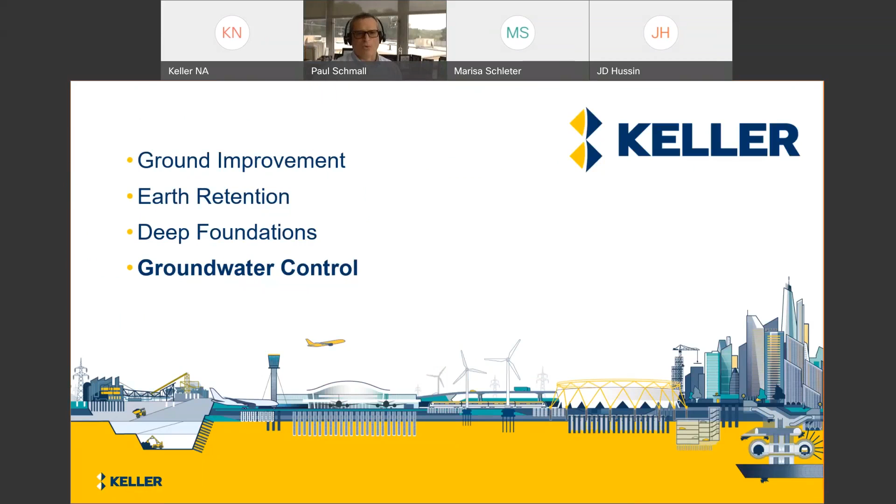And groundwater control may consist of these different techniques that you see on the screen. So I'm going to talk about these techniques today in the next hour. So I'm trying to cover a lot of ground. So this is one of these presentations that's going to be 1 inch deep and 1 mile wide. So I am also assuming that everybody really has a familiarity with these techniques. So I'm not starting from square one with every one of the techniques and describing the technique and the pros and cons and the applicable soils and et cetera. I've stepped beyond that, and I'm assuming that everybody has passed Geotechnical Construction 101.

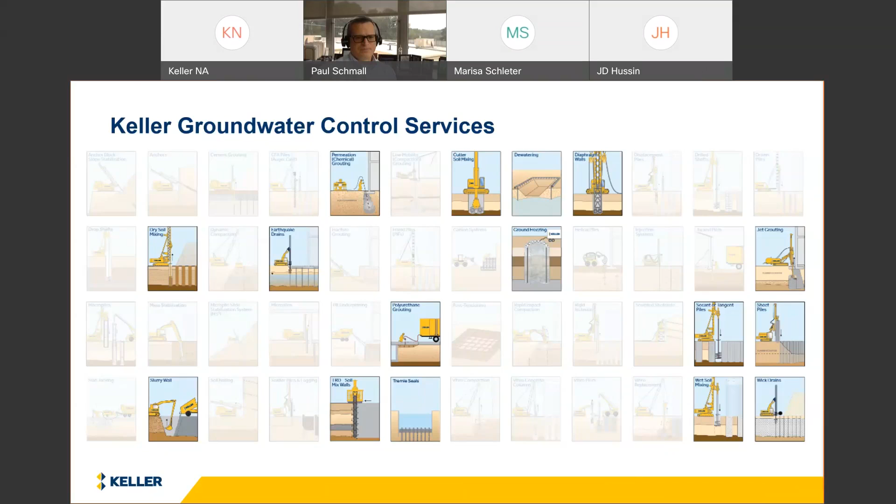So my suggestion is if I'm skipping ahead too much and you want more details on one of these techniques that I'm talking about, go to Keller's website, because there's reams of information there on all of these techniques. So in this big fuzzy category of groundwater control, there's really 2 different approaches. We can be lowering the groundwater, or we can be building barrier walls. And I kind of think of it like we're working with the groundwater, or we're fighting it, we're embracing it, or we're working against it. But it's two kind of different philosophies.

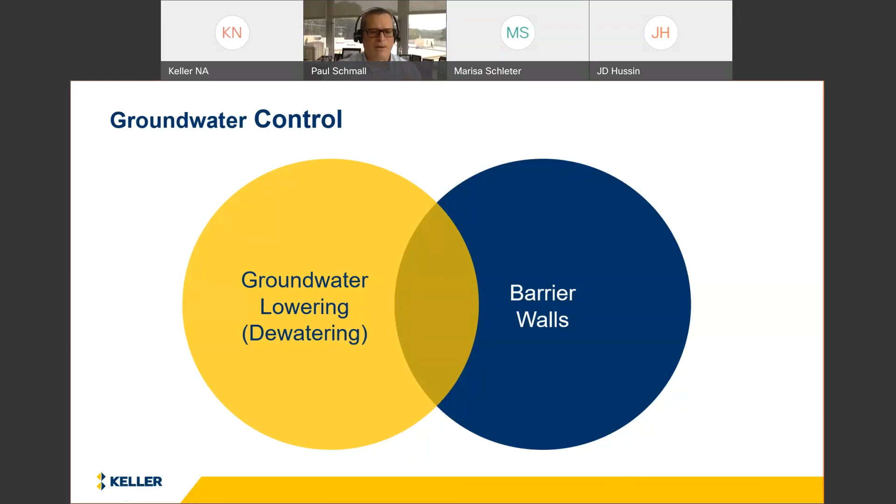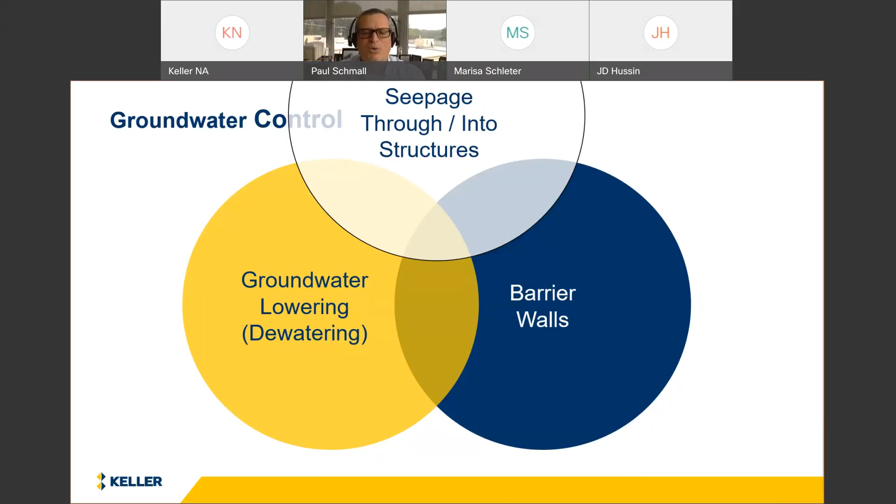And sometimes there are places where there is this overlap where the combination of these things is the right solution. So what I'm going to talk about is 3 areas of groundwater control: groundwater lowering, which we'll refer to as dewatering, that's the simple word; construction of barrier walls or cutoffs; and then managing seepage into or through structures, or excavations. So this is a lot of stuff here. So like a rat approaching a large block of cheese, we're going to start from the top and we're going to nibble our way down. So we're going to talk about dewatering first.

And I think most people intuitively know that the purpose of groundwater lowering or dewatering is not just to eliminate the inflow of water into an excavation, but also to improve the characteristics of the ground. And the photographs illustrate that very well. Same site, same ground, wet versus dry. Or in geotechnical language, more precisely, the difference between saturated and drained. So you can see the difference. It's workability, it's stand-up time, it's stability, it's shear strength, it's slope stability in excavations.

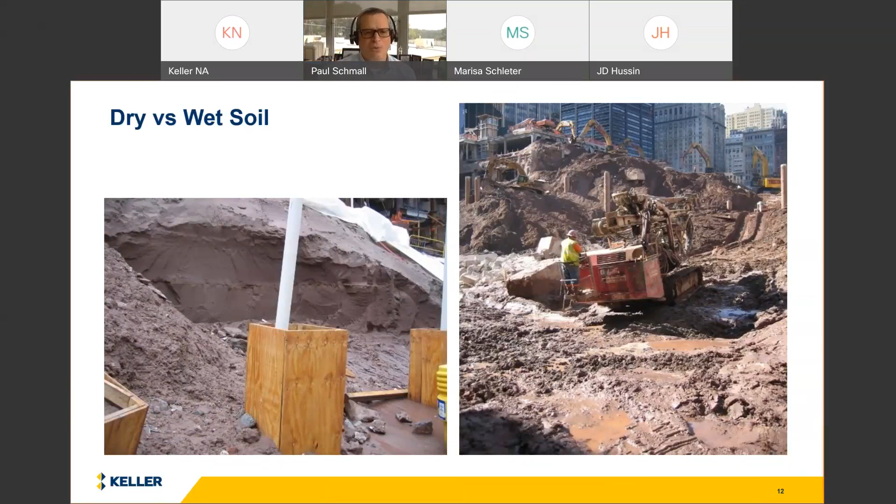So this is the same thing, drained versus wet. This is actually lower Manhattan silts that I will often refer to as bull's liver. And if you're from around New York, you know what bull's liver is. But if you're not from around New York, you have no idea what bull's liver is. Bull's liver is the native non-cohesive silt of lower Manhattan. And then this other example here of my wet versus dry.

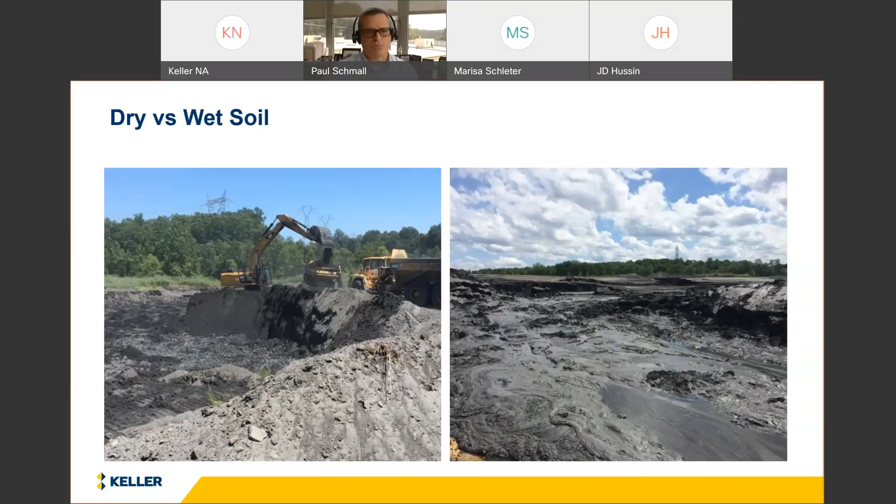This is actually fly ash. We're doing a lot of work these days in fly ash and coal combustion residuals because of the federal mandates to close all of these fly ash ponds across the country. So the fly ash is interesting because it really exemplifies and amplifies all of these unfavorable characteristics of fine-grained, non-cohesive soils that we learn about: undrained shear strength, capillary action, liquefaction susceptibility, which is what you're looking at in the pictures here.

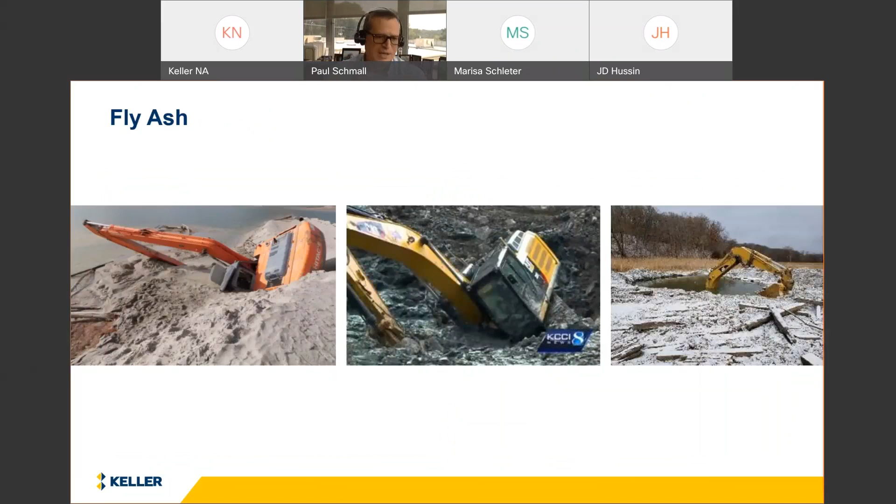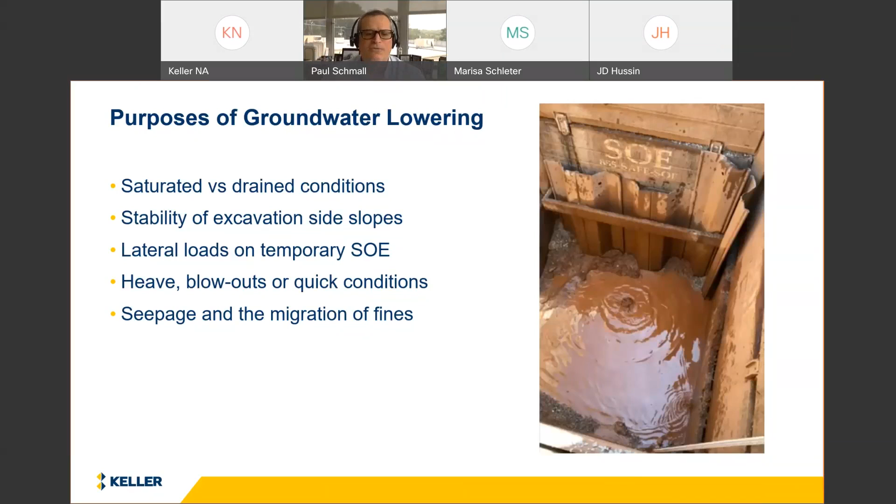So with the purposes of groundwater lowering, like I just said, the one that I think people think of maybe first or foremost is saturated versus drained conditions, stability of excavation side slopes. Sometimes it's for the purpose of taking lateral loads off of support of excavation. Then there's also the purpose of preventing heave or blowouts or quick conditions within an excavation. But the biggest one, or the most critical one, at the bottom of my list here is controlling seepage and the migration of fines.

My scary example is this. This is a project in Cologne, Germany. This was probably about 10 years ago now. It was a dewatering mishap. It was a tunneling project, a deep shaft excavation, and they were pumping water from inside of the excavation, like you see in the figure on the right.

But they were pumping, we call it open pumping, just throw a pump into the excavation, pumping a lot of water, and maybe with every gallon of water they were pumping, they had a little bit of sand in the water. So over time, a lot of gallons equals a lot of sand, and you've moved a lot of material. And what they believe happened was they lost the passive toe of the slurry wall because of piping inside the excavation, and then the shaft collapsed. This is my extreme example of migration of fines with improperly executed dewatering or improperly executed groundwater control.

So the big thing, all those other purposes that I mentioned before, they may be very significant purposes, but they don't have catastrophic ends such as the migration of fines. So this is a more realistic, more day-to-day example of migration of fines. It's an excavation where a contractor installed widely spaced dewatering wells, and it should have been closely spaced, and they had water flowing into the excavation, and the water is bringing sand into the excavation. Bad things happen where the ground comes from when the ground migrates.

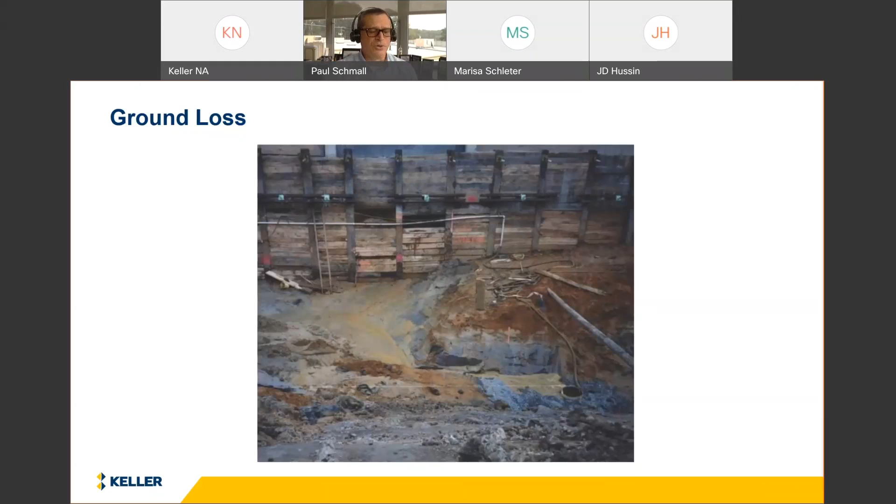So when we have the need for lowering the groundwater, we're in soils that are susceptible to movement. We do this thing that we call pre-drainage dewatering. What does that mean? It means we're installing wells, well points, or ejectors, the common tools of dewatering, in order to pre-lower the water level within an excavation prior to the excavation. It's key that you construct the devices properly so that they disallow the migration or movement or erosion of the natural soils. That's all in the filter pack design.

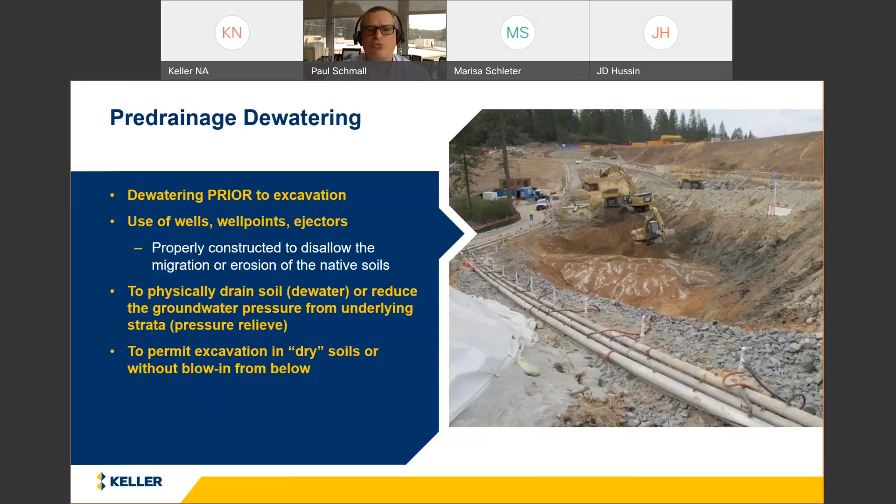And then we will physically drain the soil, which is what we call dewatering, or we will reduce the pressure underneath an excavation. That's what we call pressure relief. And this will permit excavation in dry soils or prevent blow-in from below. Okay, that's pre-drainage dewatering. Dewatering is easy when the soil is free draining.

I should say it's readily achieved. Maybe it's not easy, but it looks like it's well done. The end result can be achieved readily if the soil is free draining and there are no impediments to drainage, no impediments like layering within the soil. Okay, and when the amount of recharge that may be present at a site can be accommodated by the dewatering system itself.

Okay, in the photograph here, you see a picture of an excavation out in the middle of a river. You can tell that it's clean, sandy soil out in the middle of a river. And most people would say, whoa, you can't do that. You're right there, you've got your recharge right on top of you. It's done all the time. Dewatering contractors do this all the time. They understand that if the dewatering system has the capacity to handle and accommodate the recharge that may be available locally, it can be done. So this is what can be readily achieved.

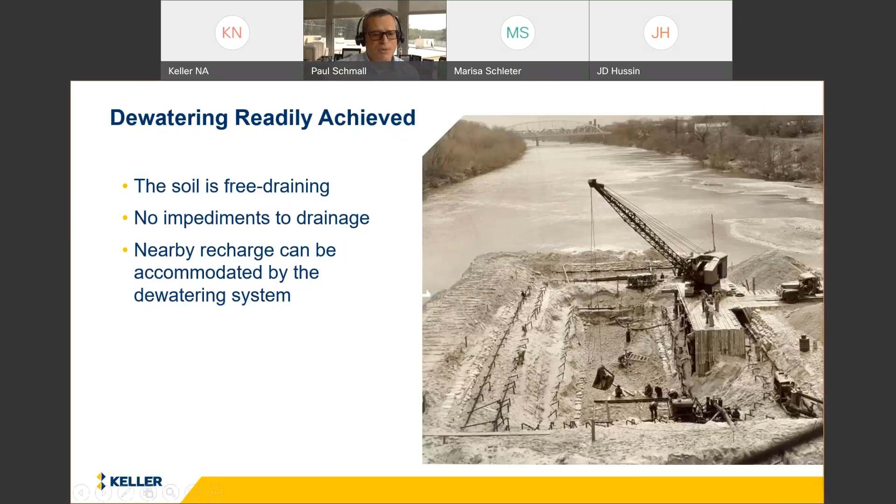When it is difficult is when you're in a situation where the soil doesn't want to give up the water. You're in fine-grained soils that don't readily give up their free water, or you have impediments to drainage. Water has to flow vertically for dewatering or groundwater lowering to occur. And when you have horizontal layers that prevent the water from flowing vertically, that's an impediment to drainage, like you see in the picture in the upper right. And when you have a condition like that, you subsequently have a condition like the one on the lower right, where this is an excavation that has basically been abandoned because it got down to an interface where coarse material is over fine material and the water just wants to flow into the excavation.

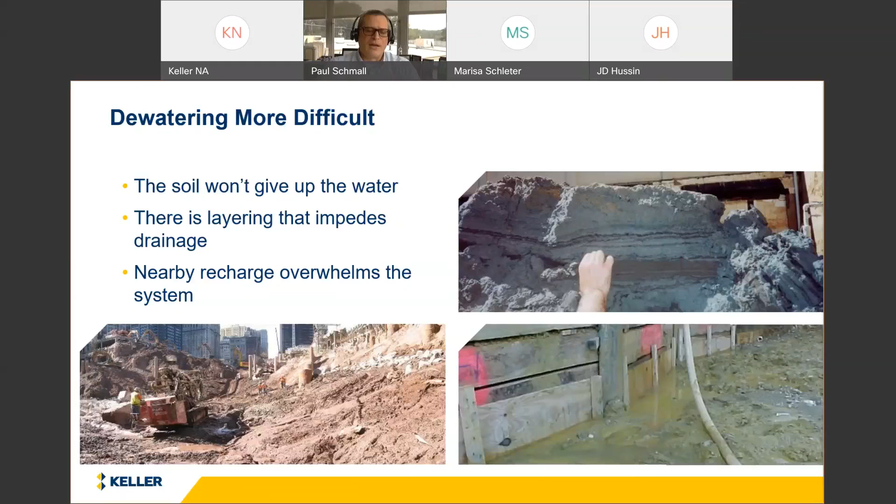So I mentioned when dewatering is readily achieved, the dewatering system can accommodate the recharge. When you're in low permeability soils and you have a dewatering system that's going to draw very little water out of the ground, if you have more water than that capacity introduced to the situation, say from leaky utilities or something like that, that's when you're going to have problems. And you typically have problems in low permeability soils because of an amount of recharge to the site that overwhelms the capacity of the dewatering system.

So these are a number of projects here. I'm in fine-grained soils. I want to say beware of the non-cohesive silt material. Every one of these pictures, there's a story behind it, but most of these stories really go back to somebody thinking, oh, you know what, it's low permeability soil, it's not a big deal, because somebody will say there's not a lot of water in the ground. That's kind of like the old school way it's referred to. Oh, there's a lot of water in the ground over there, or there's not a lot of water in the ground over there, whether it's high permeability or low permeability.

When it's low permeability material, there may not be a lot of water in the ground, but the material may not be stable at all when it is saturated. So that's when you have these horror stories, these unfortunate occurrences. So this is my most common dewatering misconception, and that is, if there is a lot of water in the ground, then the need for dewatering should be taken seriously. Okay, that's not the way to gauge it. It should be based on the likely stability of this ground when saturated, and that should determine if dewatering should be taken seriously or not.

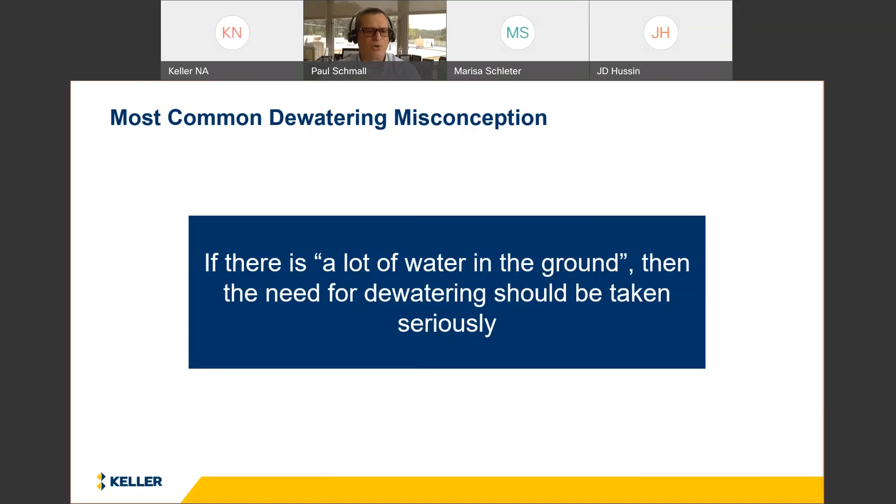So how do you know? How do you flag when you have these types of soils? I'm going to give you a little quick recipe. Okay, the typical non-cohesive silt that pops up in various areas around the country typically has a grain size distribution curve that looks like 10% sand, 80% silt, 10% clay size particles.

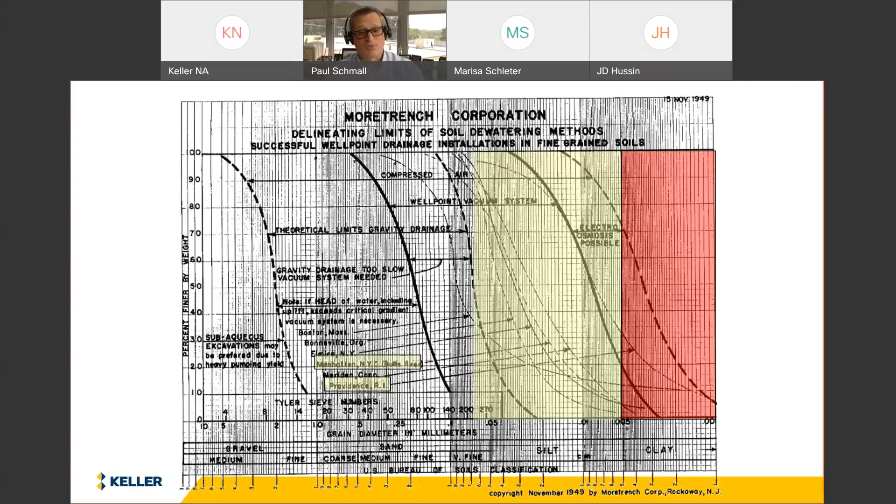And of course, there's a plus or minus with that. But then there's a very low plasticity index, typically less than 3. So this is Manhattan bull's liver silts, the material that I showed you before that's around the World Trade Center. Very, very well-known unstable materials. Providence silt also has the same grain size distribution as typical fly ash, which is a ridiculously unstable material.

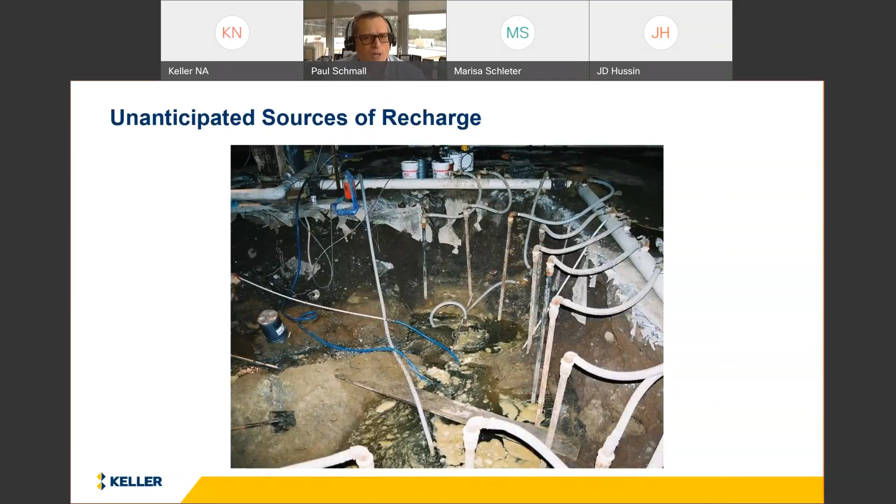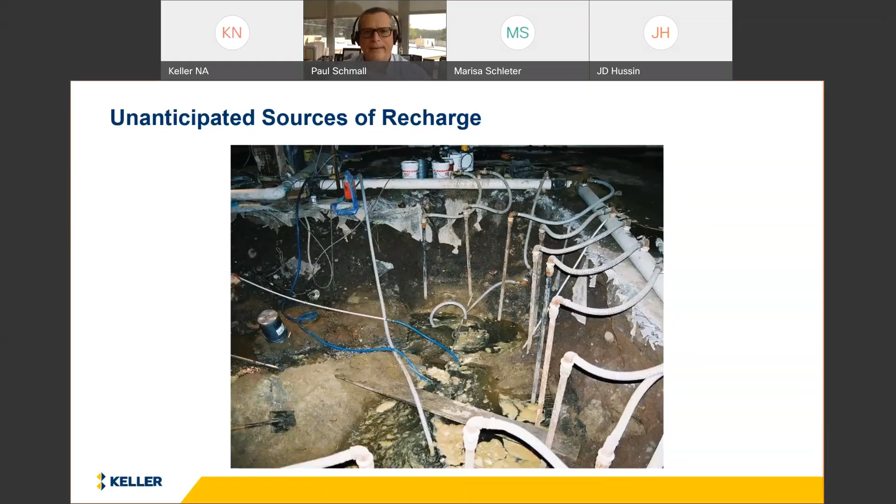And then beware of unanticipated sources of recharge, like I mentioned, particularly when you are working in low permeability soil, where your site has very little ability to absorb any kind of recharge that is introduced to the site, say from leaky utilities, or runoff that finds its way to one particular area of the site. This photograph here is an unfortunate condition on a site where there was water flowing through filled ground and filled ground below the water table. It's a mixed bag. You just don't know what you're going to have. So beware of water and fill, and especially in low permeability soils.

And then when you're doing dewatering in urban areas, you're always going to have water treatment. You have contamination everywhere in urban areas, and even if it's not on your site, you have contamination across the street. It's coming. So there are reams of water treatment technologies that you can use to address the water conditions on any site. You need to know not only the chemistry of the contamination on site, but also the natural groundwater chemistry. Do you have fouling agents such as high iron in the water, which tends to gum up treatment equipment? You need to know the aquifer parameters like permeability, radius of influence, et cetera, so that you can design a dewatering system, because with the treatment, you need to know the flow rate. Because that's going to drive the cost of the treatment.

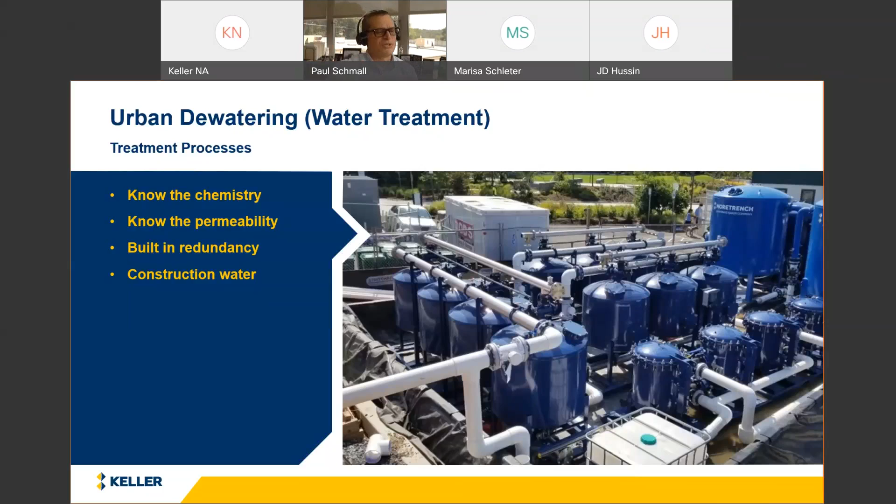And then on dewatering systems, you have to have built-in redundancy so that you can maintain, swap out equipment, change media, et cetera, without ever having to shut down the treatment system. It's not like you're treating the water at the corner gas station. You have to have a lot of built-in redundancy with the system. And then sometimes the construction water on the site is actually the most difficult thing to treat for. So that was it for dewatering. Okay, that was the crash course, a third of an hour.

Okay, so now we're going to talk more about groundwater exclusion, cutoff walls, and barriers, like I mentioned. So we're on groundwater control area number 2. The first thing that I want to talk about is the concept of the bathtub excavation. I use that term to describe excavations that have impermeable perimeter walls that extend down to a natural cutoff stratum, a low permeability layer, or if there is no stratum within reach, there's a man-made bottom. But it's a bathtub, it's a watertight excavation.

So why would you do this? You typically do these bathtub excavations in urban areas where there is concern about contamination migration, or the presence of compressible soils, such that if you lowered the groundwater 300 feet outside of the site, you're going to see settlement out there of those structures. You may have timber piles. Boston, New England, are well-known urban areas where you have timber piles that can't be dried up and then resaturated, because you get biological degradation of these wooden piles underneath these old historic structures.

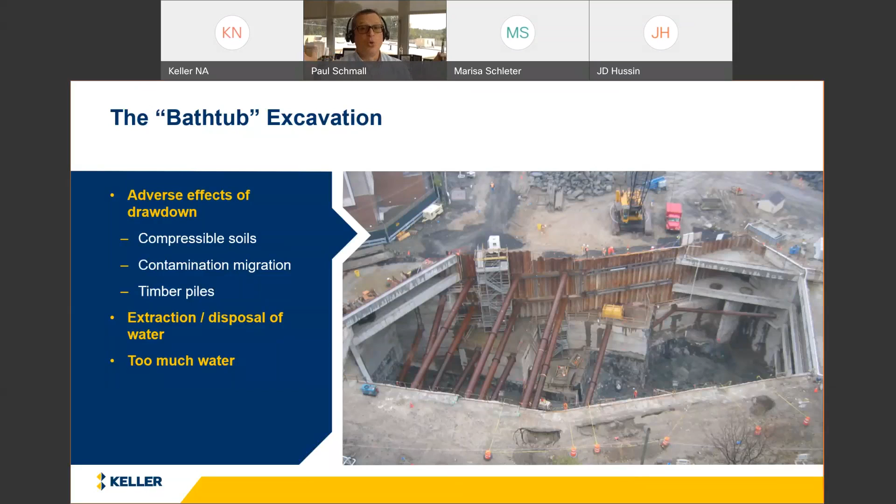Sometimes you make a bathtub excavation when there's an issue with extracting water out of an aquifer, or there's an issue with disposing of the water or the mechanism of disposing of the water. Sometimes, and I'll talk about an example or two, if you were going to dewater an excavation, it's just too much water to handle, to dispose of, to get rid of, to pump, to economically dewater. So when you have these bathtub excavations, there's really two components. You have vertically installed perimeter walls, and then you have a bottom. And we're going to talk about the man-made bottom for these bathtubs.

So you can see my icons here, the techniques that you would use for the construction of these perimeter vertical walls. Steel sheet piling, but I'm not going to talk about steel sheet piling.

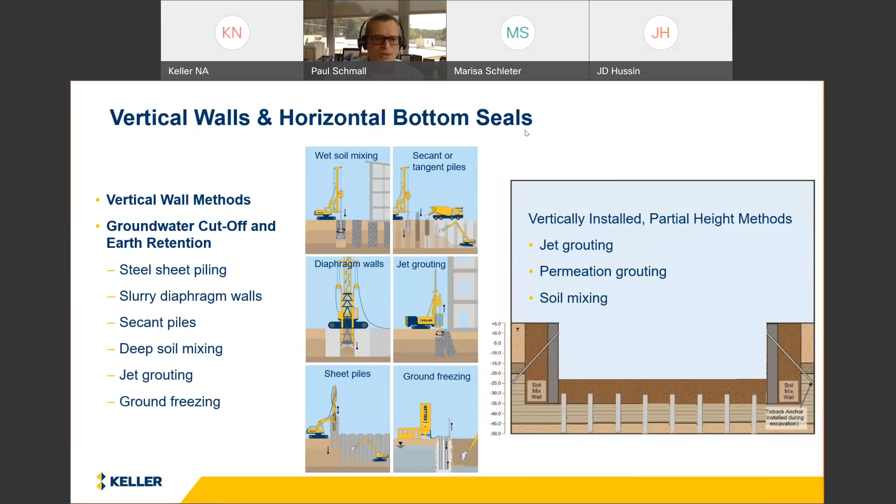You guys don't need me to talk about steel sheet piling. Slurry diaphragm walls, secant piles, deep soil mixing, and then I would say less commonly, but in special circumstances, jet grouting and ground freezing. You see ground freezing when it's more like, instead of a bathtub excavation, it's a bathtub shaft. It's a very deep excavation. It's a tunneling excavation. So let's talk a little bit about those.

So this is a good picture of slurry diaphragm walls. With slurry diaphragm walls, and for all of these things, I'm going to try and show you the tools that are used for constructing them. With slurry diaphragm walls, you have a couple of different tools depending on the depth and the ground conditions. The simplest and most basic is a cable operated clamshell, which could get you typically to about 120 foot in depth. You could be in a reasonably wide range of soils, but if you get into boulders with the clamshell, you're using a chisel, which some people would refer to as a barbarian technique for excavating slurry walls.

So the cable clamshell, the next step above that is the hydraulic clamshell. We have been to 250 foot depth with hydraulic clamshells in stiff soils. The hydraulic clamshell, as opposed to the cable clamshell, is steerable. The frame is steerable, so you can steer as you're excavating. Built-in inclinometers, you know where you're going with the hydraulic clamshell. You're going to get to 250 foot depths with both the clamshell installations. You're going to have end stops. You're going to have water stops. When you jump to the next tool, the hydromill eliminates the need for end stops and water stops.

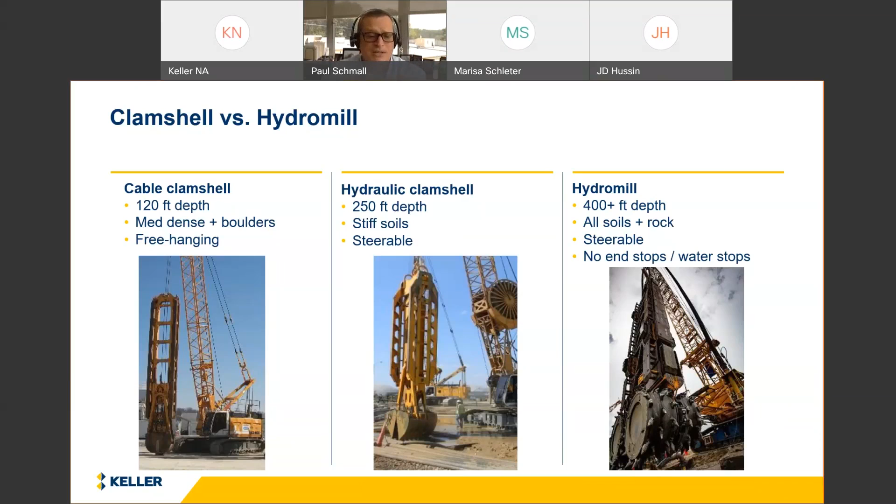And a lot of the conditions that we have experienced, at the time, we were very much first. We have lots of boulders, high permeability overburden, hard abrasive rock, low headroom conditions, very steep rock surfaces. I think we've been through it all. We've used the hydromill for the vast majority of our work, and we'd be very happy to share our experiences with you with all of these techniques, to be honest with you. But particularly, our resume with diaphragm walls is outstanding.

One of my favorite projects is this Blue Plains Tunnel, 42-inch walls, 175 feet deep, with blockouts built into the wall, so that once the shaft was excavated wet, you could punch out the shear plugs into the wall, so that the tremie that was poured at the bottom of the shaft was keyed into the wall. We do that typically on these diaphragm walls. So you can see some of the big cages that were used here for some of the larger multi-bite Y panels that were done on this binocular shaped shaft.

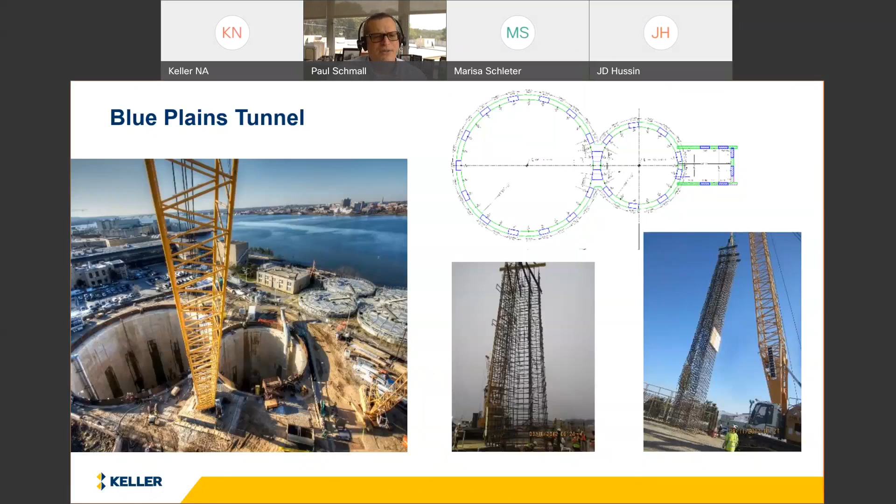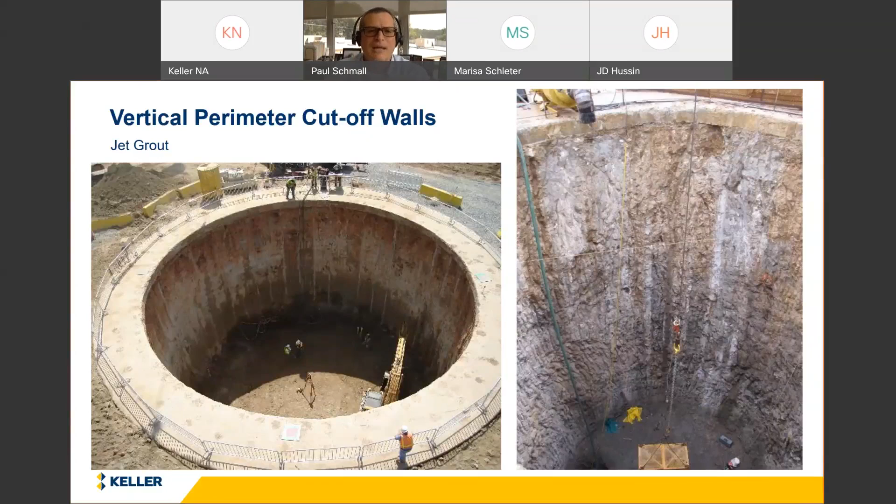That's where you would typically see jet grouting as well. Jet grouting is applicable over a wide range of soil conditions, and like secants, it's susceptible to borehole deviation, which is probably its limiting factor. So if diaphragm walls, slurry diaphragm walls, and secant piles are replacement techniques, jet grouting and soil mixing are mix-in-place

techniques. So the end product is basically a function of the in-place soils and the binder that you introduce in the process. Soil mixing is appropriate for ground that's neither very stiff nor very dense, with no boulders or obstructions, and where your treatment depth is typically less than 40 meters. And for most soil mixing techniques, you need unrestricted headroom, because most soil mixing techniques are single stroke operations.

So if you're going 100 feet into the ground, you need 100 feet plus of equipment to do that single stroke. But with soil mixing, I swear there are 31 flavors of soil mixing, and every contractor has their own special setup, and it really comes down to what's the tool that you're using to do the mixing, and all sorts of variations with the flights or the blades and shear blades on the tools. What's the orientation of the axes, and are you introducing jetting into the operation? You can mix and jet at the same time. So that's kind of how, with all these different variations, you get

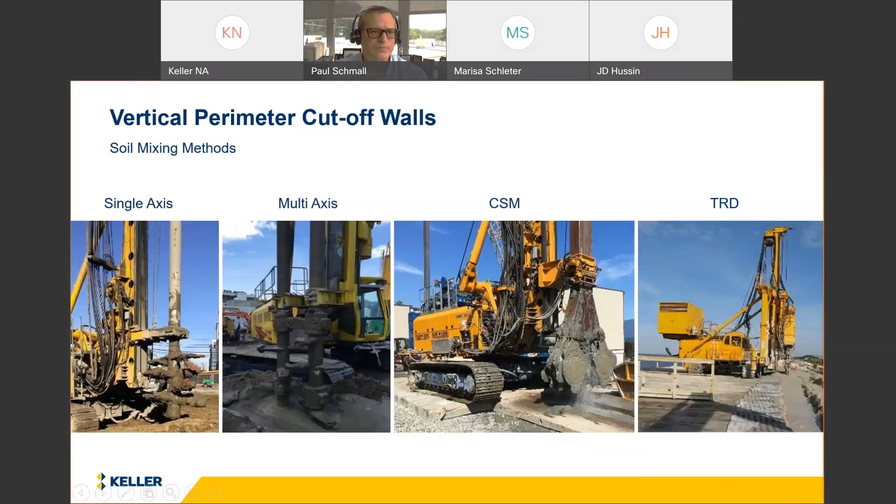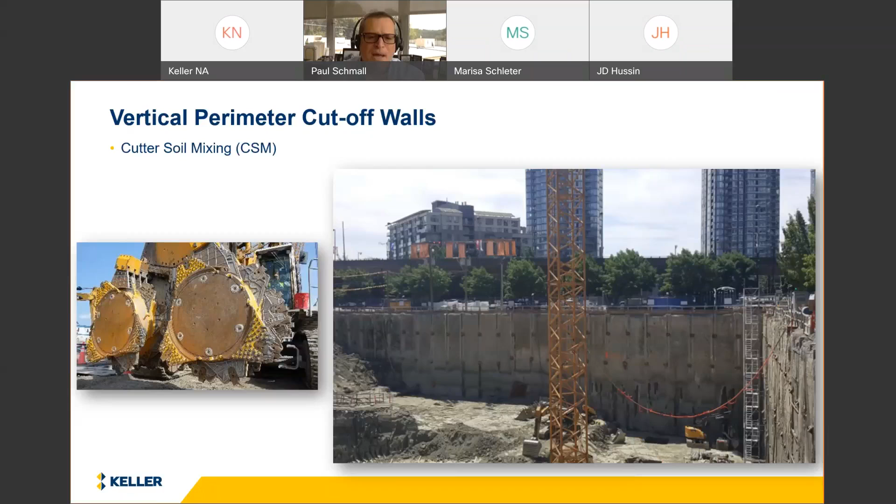So the first one I want to talk about is what is known as cutter soil mixing, or CSM. The tool looks like a hydromill, because basically it's the same cutting wheels as a hydromill uses. But instead of displacement with these horizontal axis rotating cutter wheels, you're mixing the soil as you penetrate down and introducing binder on your way back out. It's a more aggressive mixing technique, so it's applicable to a wider range of soil conditions. And I think you can see you can penetrate a lot of things with these cutting wheels. So we've done this technique up to depths of 130 feet. I believe the equipment is capable of going to about 165 feet. And the photograph that you see on the right is a structural CSM wall where you mix the soil in panels and then drop beams into the panels for your reinforcement.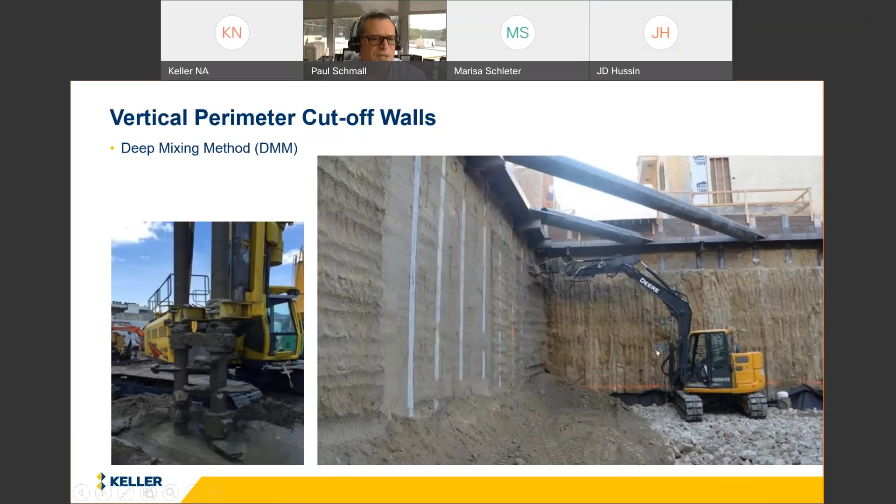So the next technique would be multi-axis mixing, and there can be 2 different vertical axes. There could be 4 or 5 different vertical axes, and that's a configuration that lends itself very nicely for making walls. So you see on the picture on the right, we're trimming a soil mixed wall within this excavation. And then TRD is short for trench remixing deep.

This technique is very good for making very homogeneous soil mix. You will mix very thoroughly from top to bottom within this trench, which is not something all soil mixing techniques have; they don't have the same homogeneous mixing as the TRD does. Beautiful things about the TRD: there are no joints, and it's always the joints in cutoff walls that are the point of weakness. There's no joints. It's thoroughly mixed. It's a relatively low headroom piece of equipment. How I said most soil mixing techniques are single stroke, very tall pieces of equipment. This is a low headroom piece of equipment, which is good for working very close to water, where water is within a couple feet of surface, and where there may be more concerns about working platform stability.

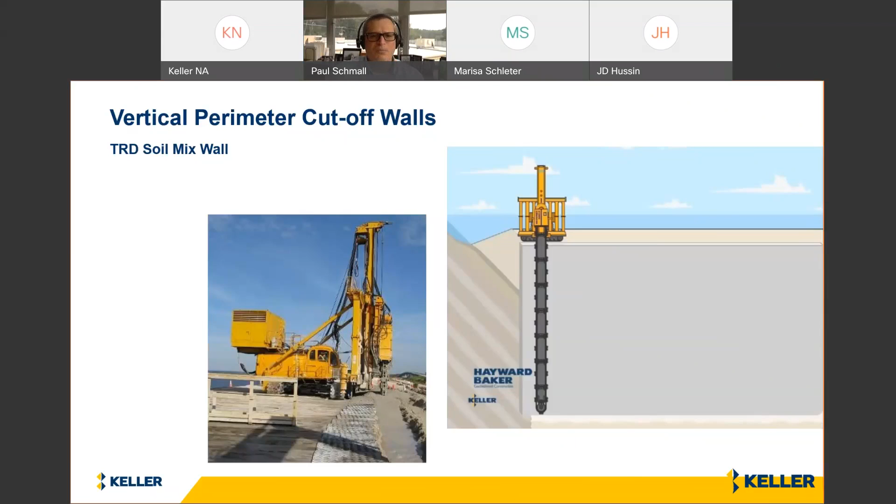This TRD can also key into weak rock. It can key into stiffer layers. It's a pretty versatile tool. You can see in the photograph here, this is another structural wall, a TRD, where beams have been placed into the trench following the mixing. And you think of it like beams and lagging. It's beams and soil mix.

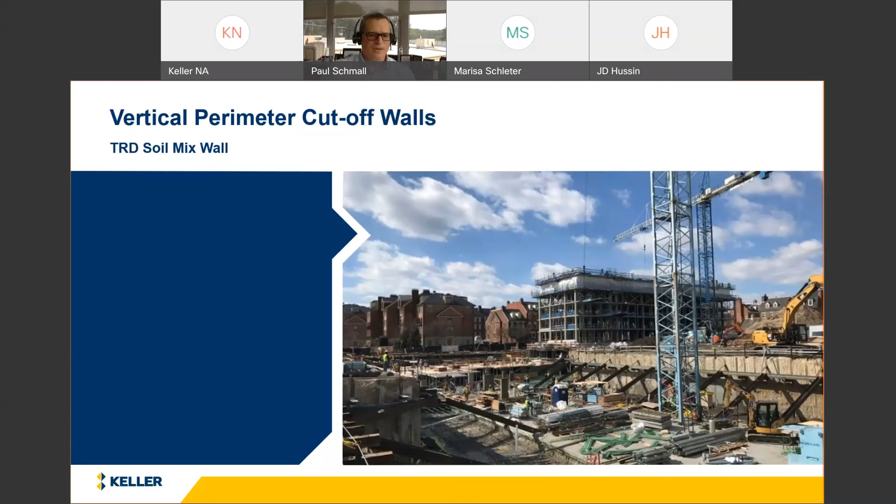So that's the TRD. So now that brings us to our next chunk of techniques, where we're talking about the bottom seal, the bottoms for these bathtub excavations. So the bottom seal, I use this term bottom seal. You could think of it as a pre-installed bottom to these bathtub excavations, as opposed to like a tremie bottom. So it's pre-installed.

Generally, the larger the excavation, the more square footage, the more a bottom seal makes sense rather than a tremie. And the techniques that we're going to talk about here, I'm going to call them vertically advanced or vertically installed partial height methods. And those are jet grouting, permeation grouting, and soil mixing.

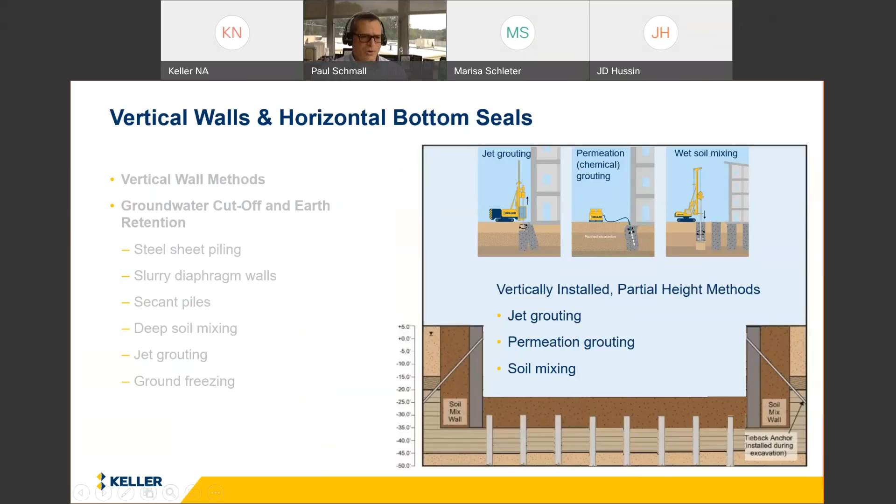So these are 3 different configurations of bottom seals. We'll call the one on the left a massive bottom seal. And if your design relies on basically just the weight of the bottom seal to counteract hydrostatic uplift, these massive bottom seals can be pretty darn thick to offset the hydrostatic loading, which leads us to the necessity for the next type of bottom seal that you see in the middle here. This may be a thinner bottom seal, but it's tied down to withstand the hydrostatic uplift.

And then the bottom seal on the far right, we're going to refer to that as maybe a deep blanket seal. See the same excavation subgrade for all of these scenarios, but this deep bottom seal relies on the weight of the material above that bottom seal to withstand the hydrostatic uplift. But the bottom seal itself is relatively thin, which is why we'll call it a blanket. So the first two are more like structural bottom seals, and the one on the right is not so much structural, but call it a hydraulic bottom seal.

Typically you're going to see these techniques used for these types of bottom seals. Not all the time, but most of the time. So it'd be a jet grouted bottom seal on the far left, and then the middle one may be jet grouted or soil mixed and tied down, and the one on the far right may be permeation grouted or it may be jet grouted, but most of the time it's going to be permeation grouted.

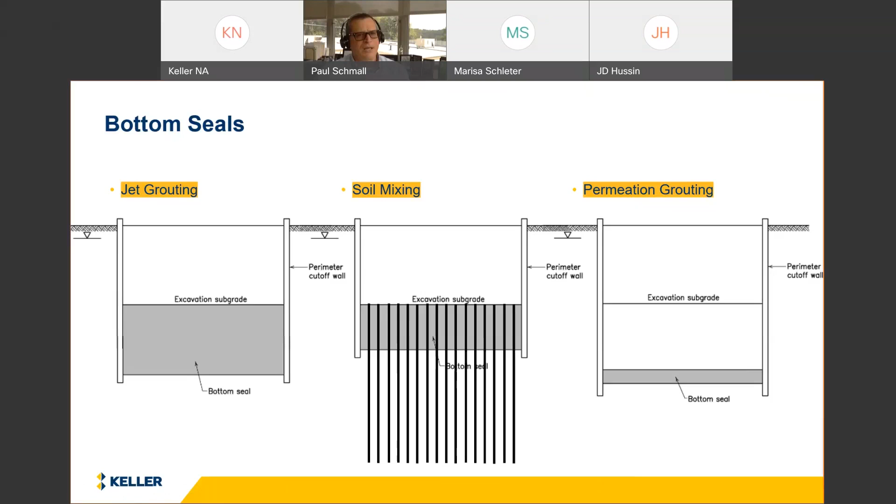Okay, so this is what some of these bottom seals may look like in real life: jet grouting and soil mixing and permeation grouting. So there are a number of considerations when you're doing bottom seals. I think of the bottom seal as the riskiest thing that we do. There's a heck of a lot of quality control, a lot of procedures, a lot of everything that goes into making sure that these jobs are done very, very well.

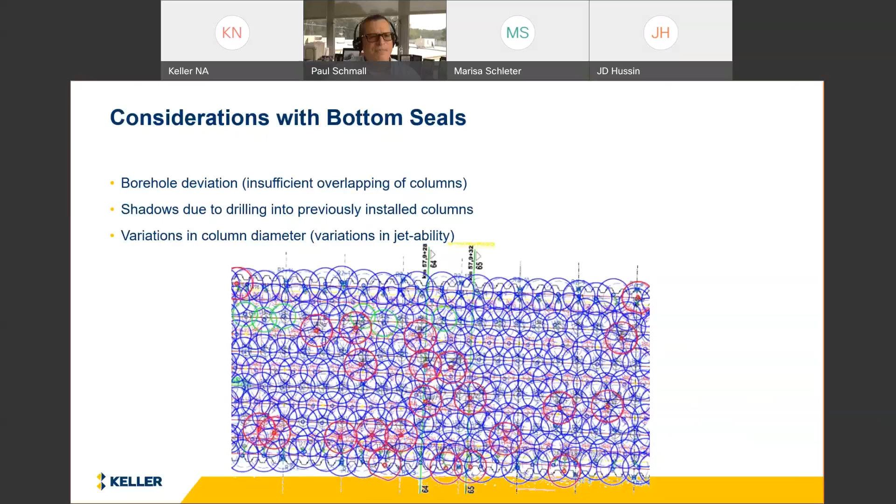You're looking at survey data from borehole deviation from a jet grouted array of holes for the construction of a bottom seal. So in the context of jet grouting, we're concerned about borehole deviation. We're concerned about insufficient overlapping of columns. We're concerned about shadows due to borehole deviation and the borehole that may deviate into a previously jetted column. So it's going to blind you off from the column that you're intending to jet. So there's also variations in column diameter and variations in jettability of the ground at depth. And those are all taken into consideration into the design of a bottom seal.

There's been a long history of failed grouting attempts in Miami. Bentonite cement can fill voids, but it can't displace the silt and sand infilling in the coralline limestone, which is the ground in Miami. It's typically sampled with a split spoon sampler, so it tells you that it's weak, crappy rock that has some structure to it. Jet grouting can't erode it effectively, but what we find works extremely well in Miami is soil mixing, because in this weak material, it can be soil mixed very well and better than other techniques.

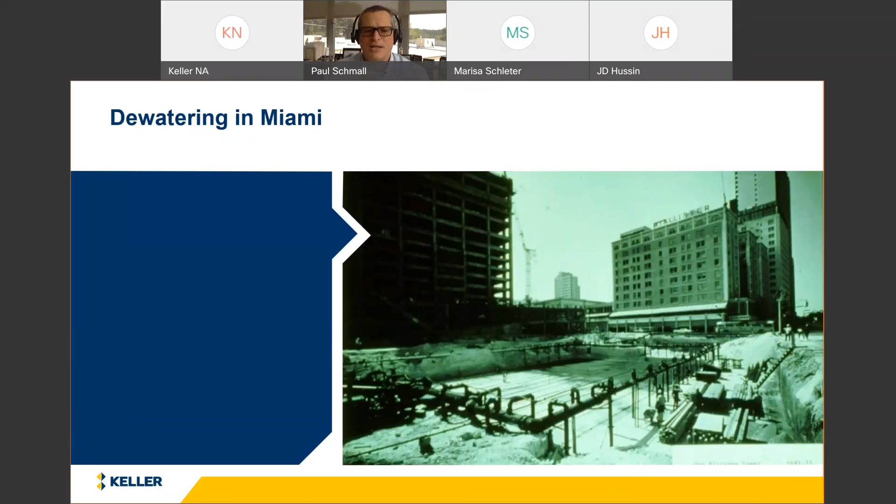So this is an example of one of many projects that we've been working on in the last 10 years or so down in Miami to construct deep basements. I think the largest of the jobs that we've done is about 130,000 square feet, with the subgrade of the excavation at elevation -35. So that's 3 basement levels down, with tie down anchors, CFA piles 182 feet long,

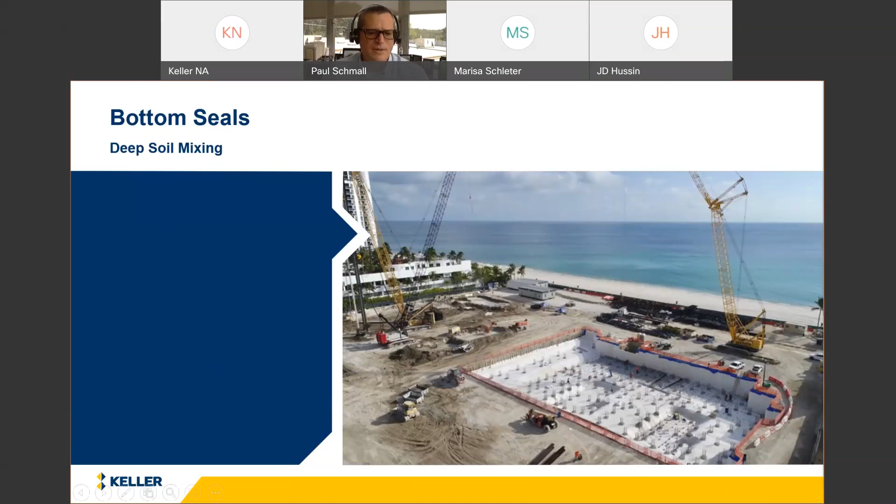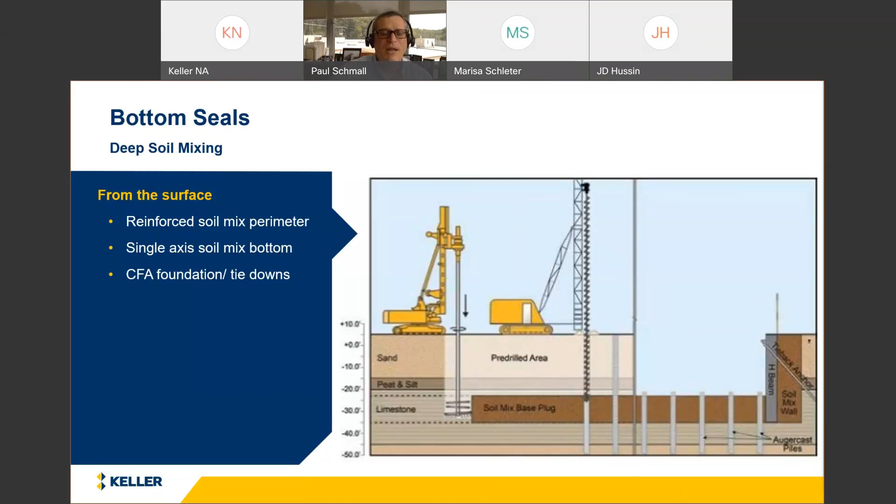in order to tie down that deep base slab. So this is how it's typically done from the surface. Perimeter walls are constructed with multi-axis soil mixing, the bottom seal with single axis mixing, and binder injected in the target zone of the bottom seal, and then the CFA piles advance through the bottom seal in order to tie it down and provide support for the structure.

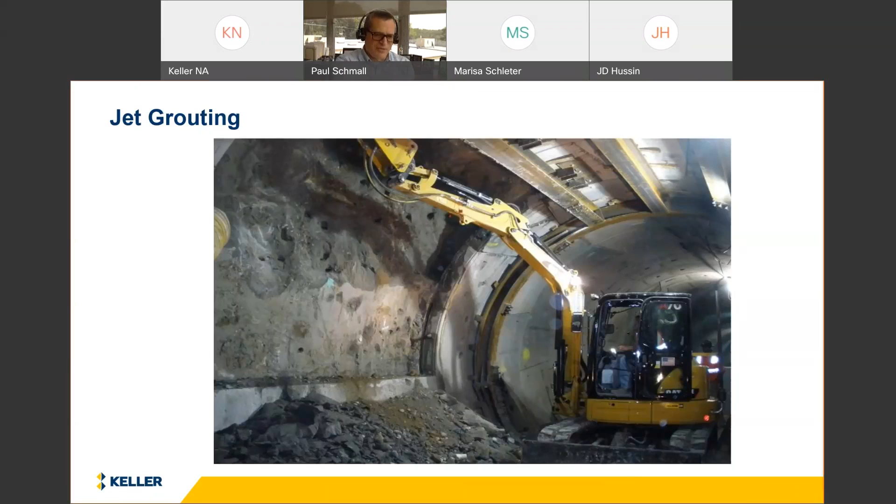So jet grouting is another example of one of these vertically oriented but targeted zone techniques that can be used for constructing bottom seals. Here's a good example in this photograph. This is a cross passage for a tunnel. We don't need jet grouting all the way from the ground surface all the way down. We just need jet grout from, say, the crown of the tunnel to the invert of the tunnel, and that's our target zone. So jet grouting is good for, hey, we just need it done from 95 feet to 120 feet, something like that. Works out very well for jet grouting.

And here you see photographs of a project where this is a tie-in into a subway in New York City, and the groundwater level was just a couple feet above the top of the structure. Jet grout, basically a curb around the excavation to keep the groundwater out. But we don't have to jet grout all the way from the surface. We actually stabbed in micropiles and did contact lagging above the water table for the balance of the supported excavation.

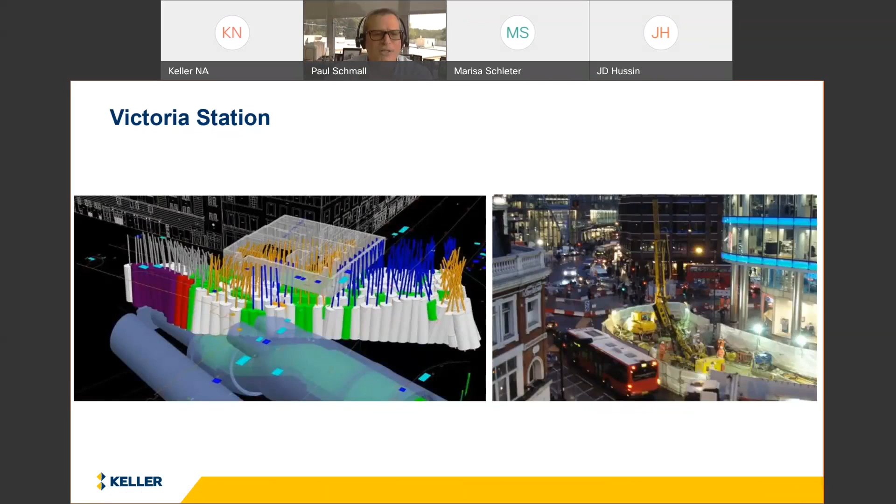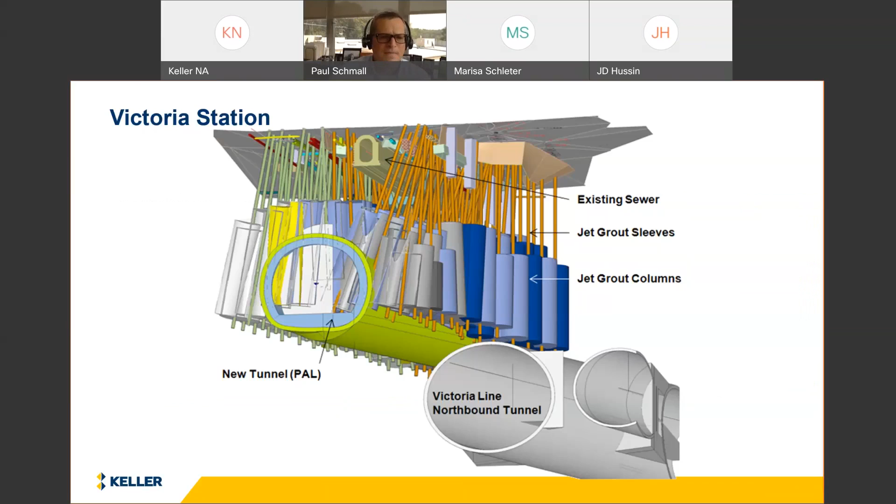This is a very cool project of jet grouting, another jet grout example. I love this project. This is Victoria Station in London. Most of the tunnels in London are done in the London clay, but not Victoria Station. There's alluvial sand and gravel sitting on top of the London clay, which is exactly where this Victoria Station upgrade occurred, and the jet grouting was done in that sand and gravel zone to create a canopy. You see this complex array of jet grout holes over the tunnel to create this canopy of jet grout over the top of the tunnel for the purpose of ground control and groundwater control.

Very extensive array of columns, 2,400 columns. All the holes were surveyed, put into BIM so that the whole thing could be laid out. But the work was done from the surface without rerouting utilities and keeping the rail service undisturbed during the process. So there were places where you just physically could not get in to install jet grout

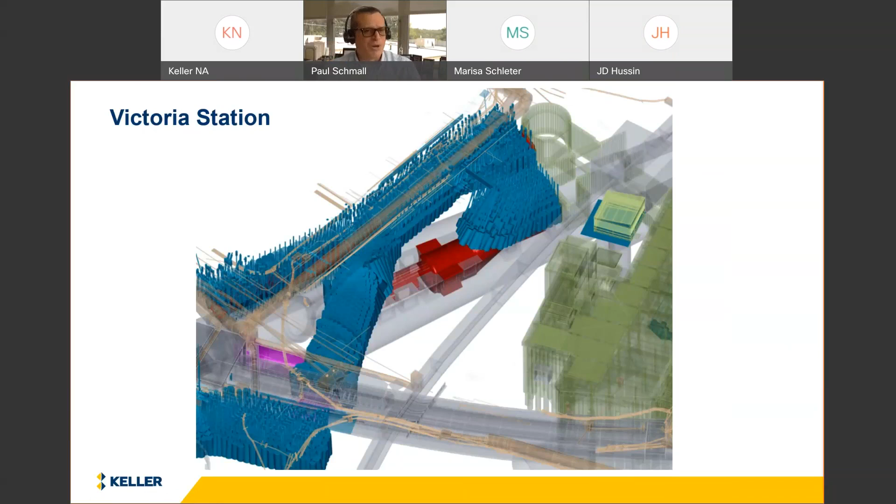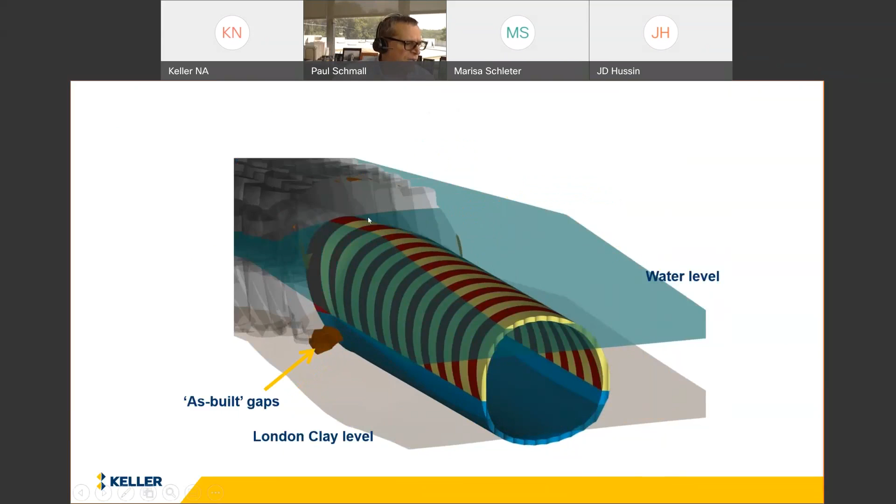columns everywhere. So those places could be addressed from inside the tunnel, but we don't want any surprises within the tunnel. So the work was done very intentionally to map where all of the possible windows could be in the jet grouted canopy over the tunnel, which is what you're looking at in this sequence of slides. Everything that's colored here is a potential window within the jet grout canopy, so that there's no surprise. It can be addressed from within the tunnel. And so there could be gaps within the jet grout canopy, but if it's within the bigger enclosed area, it's not a big deal. When you have a gap that is connected to the outside sand and gravel and you have recharge out there, then that is a big deal.

And the way that they could tell that within the tunnel is when you had a gap that was enclosed, the water that would flow out of the jet grout or out of the gap would be warm water, because it was warm from the heat of hydration of the jet grout. And if the water would flow cold or colder, it was connected to the outside source. That's the situation to be aware of, and the situation that has to be addressed adequately from inside the tunnel.

So one comment on groundwater recharge, because we're talking about groundwater control. So that was about bathtubs. We do these bathtubs when we can't lower the groundwater out of the bathtubs. But in some cases, you can re-inject water back into the ground to raise groundwater levels when groundwater lowering is a problem. There was an enormous tunneling job done in Copenhagen, where extensive groundwater recharge was utilized to balance groundwater levels, because Copenhagen's like Boston, don't lower the water levels beneath these

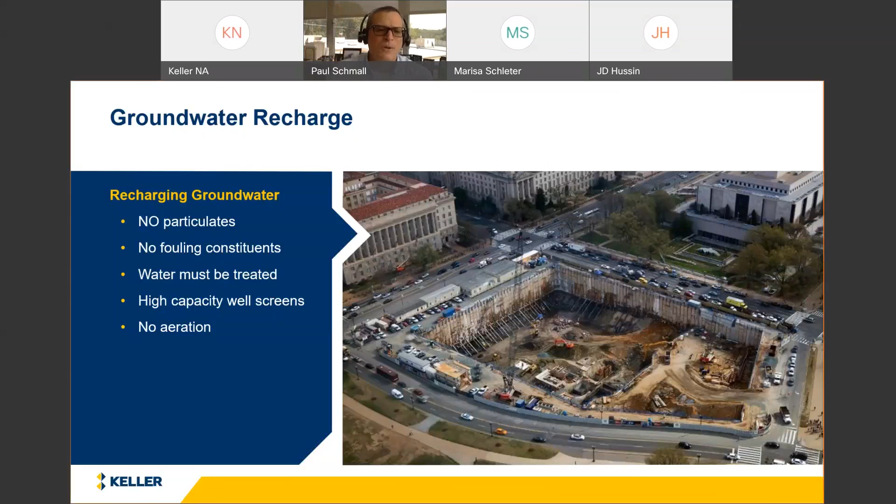level into the ground. This excavation that you see here was a large excavation that was intended to be a bathtub, and it had a lot of leakage, which lowered the water outside of the site and underneath one particularly sensitive structure that happened to be sitting on compressible soils. We put recharge wells in, treated the water before we injected it, and raised the water levels back up to where they needed to be. Recharge is an underutilized tool. It has a lot more places where we could be using it.

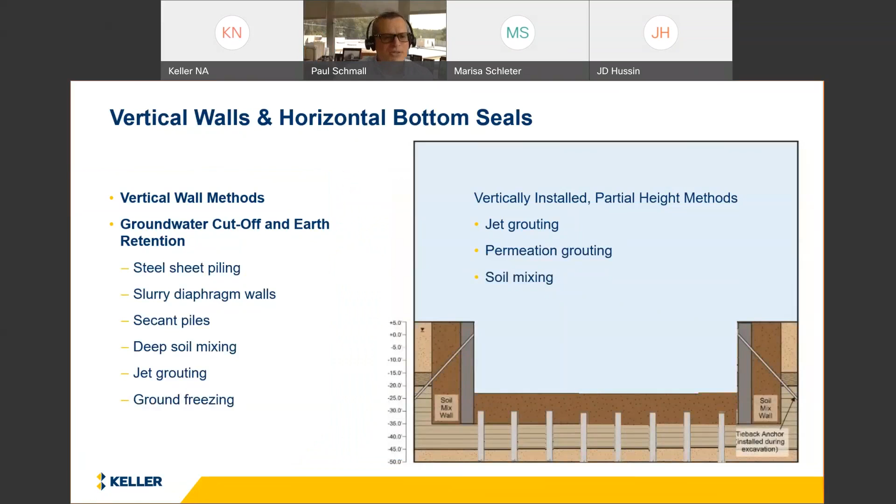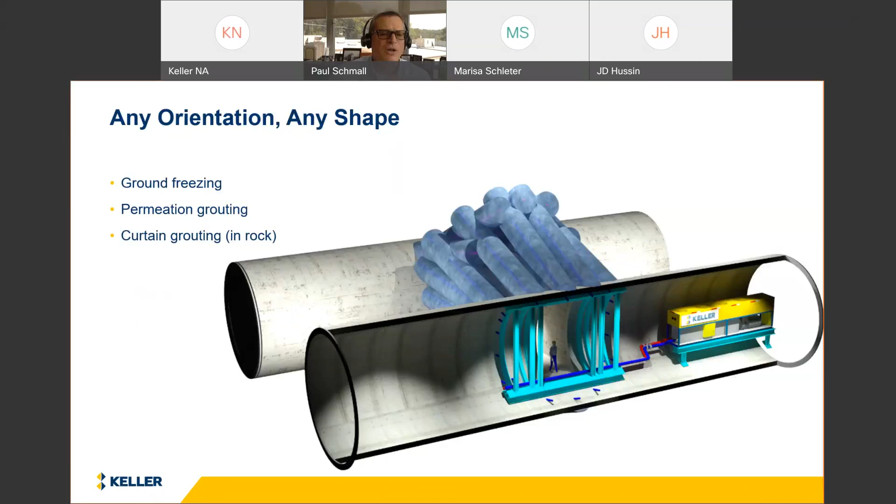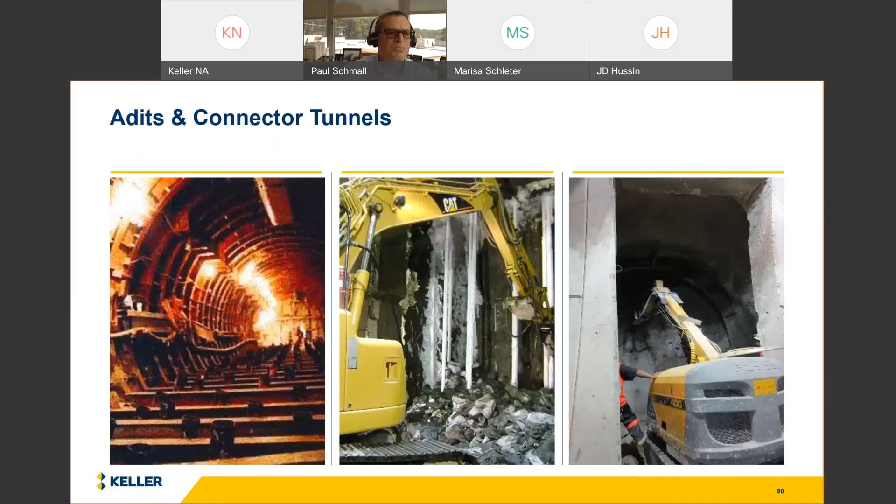So I talked about the vertical techniques, these vertically installed but partial height methods. Let's talk about methods that can be done at any orientation and any shape, like you see in this. So this is ground improvement for a cross passage, and in this array, this is considering ground freezing to be done for a cross passage construction for earth retention as well as groundwater control. So you would typically need these types of techniques when you're doing things like cross passages, like you see here, cross passages or adits and connector tunnels.

And the first technique that I want to talk about is ground freezing, because ground freezing is probably the most diverse technique that I'm talking about today. It can be used for a whole bunch of orientations: vertical shafts, very deep vertical shafts, arches, cross passages, safe havens, mixed face freezes, and you can even install bottom plugs in shafts with ground freezing, and let the freeze pipes at the perimeter carry it as the shaft is being excavated down. Very versatile, can be done in any orientation that you can basically drill a hole. So it's also relatively insensitive to what the ground condition is, which makes it work very well when you're freezing through obstructions or filled ground, or freezing up to a structure.

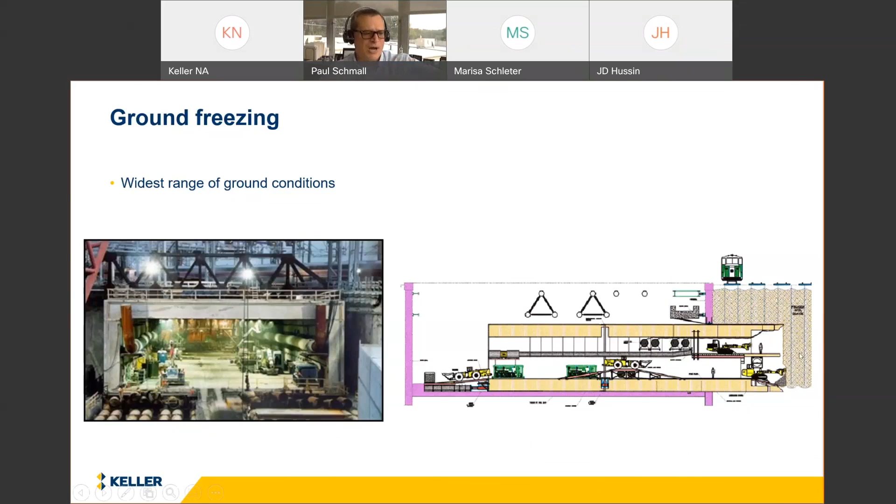This is the project on the central artery in Boston, where the fill was frozen out in front of the jack tunnel box to stabilize it, render it impermeable, and give it stand-up time. We've used it several times for homogenizing a mixed face tunnel, where it was anticipated that it was going to be a hard rock tunnel, but there's a crappy section that's going to behave more like soil. Well, freeze it, and the tunnel boring machine will think that it's all rock.

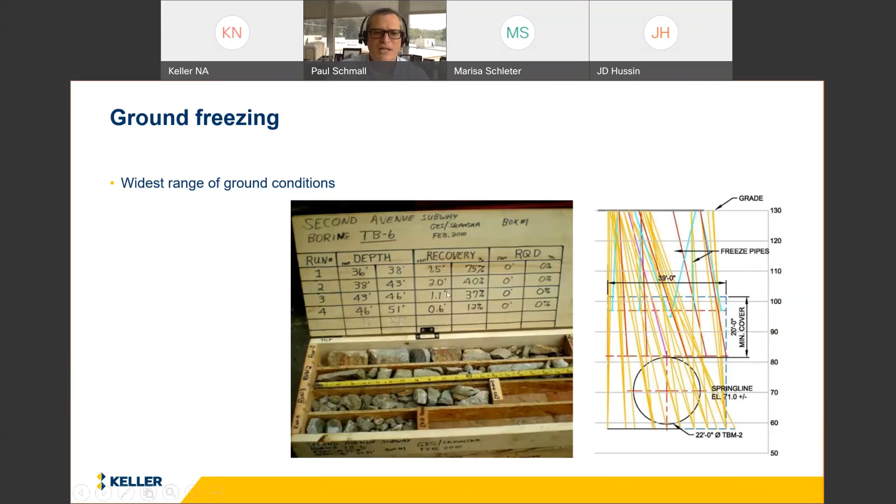So a couple of things that ground freezing doesn't like, and people are concerned about and aware of: it doesn't like moving groundwater, and it doesn't like man-made sources of heat. But I think we have those things licked, because with moving groundwater, we know how to profile the pipes, take temperature measurements in the pipes during the formation process, so we can see warm spots which may be susceptible to, or indications of, groundwater movement, and we can do grouting to reduce the groundwater velocities, reduce the permeability, which reduces the velocity in those zones, so that we can have closure without moving water conditions.

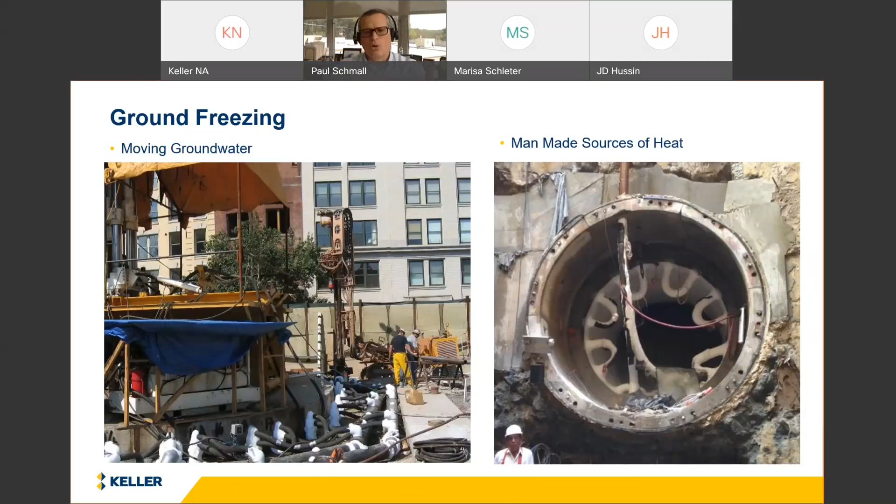And then where we have man-made sources of heat, we just know how to cool these sources of heat, or these sources of heat transfer. And that's basically the concerns that you would have with ground freezing.

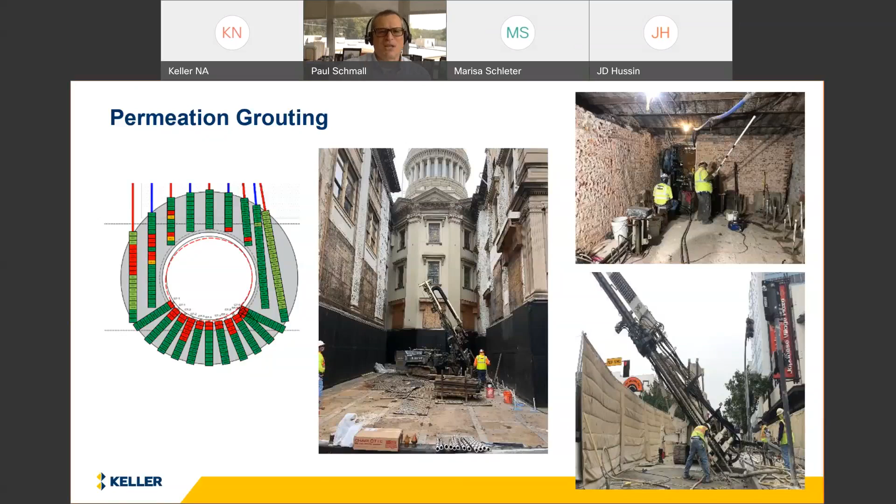Permeation grouting, like with ground freezing, you can do in any configuration where you can drill a hole. You can drill a hole and install a freeze pipe. You can drill a hole and install a tube of manchette pipe and do permeation grouting. We've even used horizontal directional drilling on numerous occasions for installing long guided tubes of manchette pipes for doing permeation grouting. And sometimes we use that same technique for installing pipes for compensation grouting as well.

So rock curtain grouting, I think, is fairly obvious. You can drill holes in any orientation in order to grout rock. And then we have also these, what I'll call non-structural cutoff walls, which I've put in order of increasing cost to the right, but moving to the left, you have increasing space requirements or increasing site access demands.

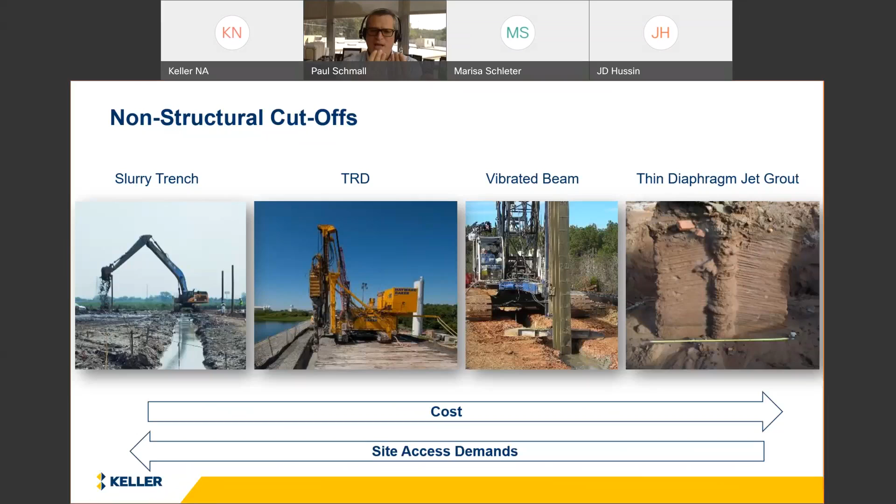So you have the slurry trench on the far left, you have the TRD, and then you have a vibrated beam, which is basically a beam that's vibrated into the ground, and you inject cement bentonite back through guides in the beam as the beam is extracted, and you overlap the penetrations with the beam. And then you could also have what we'll call the thin diaphragm jet grout wall, which is basically jet grouting where you don't rotate the monitor, don't rotate the tools. So instead of getting a column, you'll just get a fan pattern or a panel of jet grout. So that can be used for a non-structural cutoff. Those are all non-structural groundwater cutoffs where there's no structural need. It's not going to serve as support of excavation as well.

DAC is Keller for data acquisition. DAC is a noun, DAC is a verb. We DAC everything. If it moves, we DAC it. Any and all of these techniques, we DAC them. We measure anything and everything that we can during the installation process with the equipment so that we have a record of what was done. We're monitoring what was done, and we can also use DAC to control some of the processes during the installation.

But we want to have a nice record, and honestly, it allows us to communicate internationally within Keller. We have a job with these ground conditions, and here's how we did the work, and here's how it responded, and it allows us to share those experiences. So you'll see on the reports how much binder, how much rotation, how much penetration, how much pullback speed, rotation, etc. All those things can be monitored and somewhat controlled with the DAC process. So it's something that we do with all of these geotechnical construction techniques.

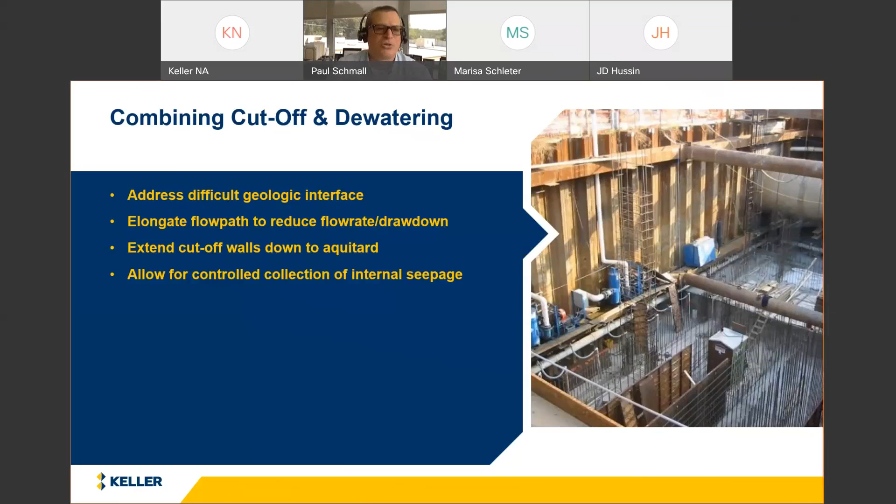So there are places where you can combine groundwater lowering with groundwater cutoffs. And typically you're doing that when you're going to address a difficult geological interface, like a coarse over fine situation where you tend to have water perched on top of that. That's one of those difficult draining scenarios. You could also elongate a flow path to reduce the flow rate into an excavation, which will also reduce the amount of groundwater lowering that you have outside of the excavation. Or you could extend your cutoff walls down to an aquitard to basically cut off the flow or significantly restrict the flow. And then you can allow for controlled collection of internal seepage by combining these things.

One example here, this is a deep excavation that goes all the way down to rock. So this is a very deep, difficult interface condition where you're excavating through very permeable sands and gravels down to an impermeable rock surface, and you'll never get the water all the way down to the surface because you can't drain it down into the impermeable rock. So you get some amount of water at that interface. That's a difficult condition to handle unless you have some type of a cutoff wall.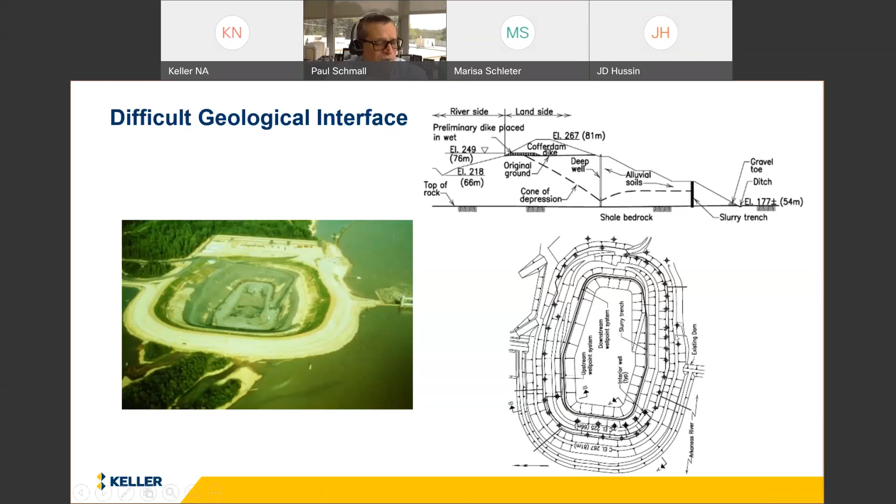In this scenario here, we installed a slurry trench around the inside perimeter of the excavation from a bench before the excavation got down to the rock surface. So we cut off the water with a slurry trench. And then we are currently working on the Hampton Roads Bridge Tunnel.

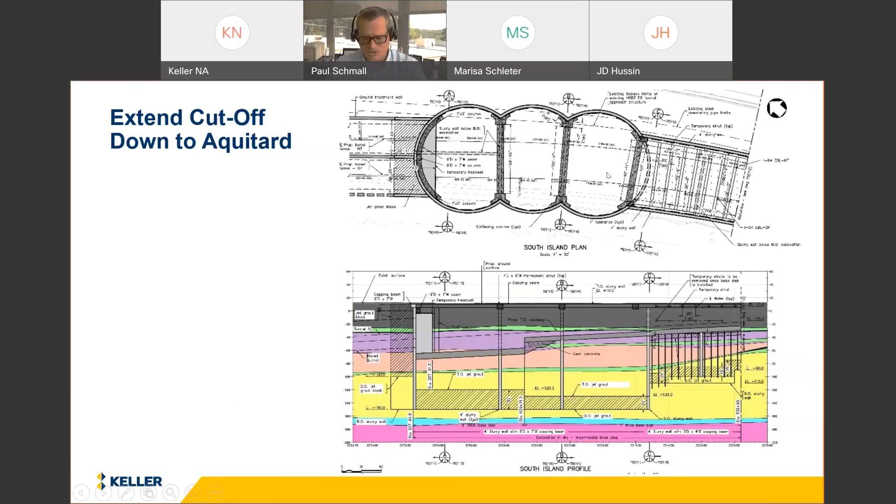We extended the walls of the launch shaft, or what we refer to as the peanut here, down to a lower permeability stratum, which allowed us to eliminate the jet grout bottom seal from this excavation. So we extended the walls down to a lower permeability stratum that acts as a significant aquitard, or restriction to the flow of water. This was a cut and cover tunnel excavation where the work was done in largely coarse sands

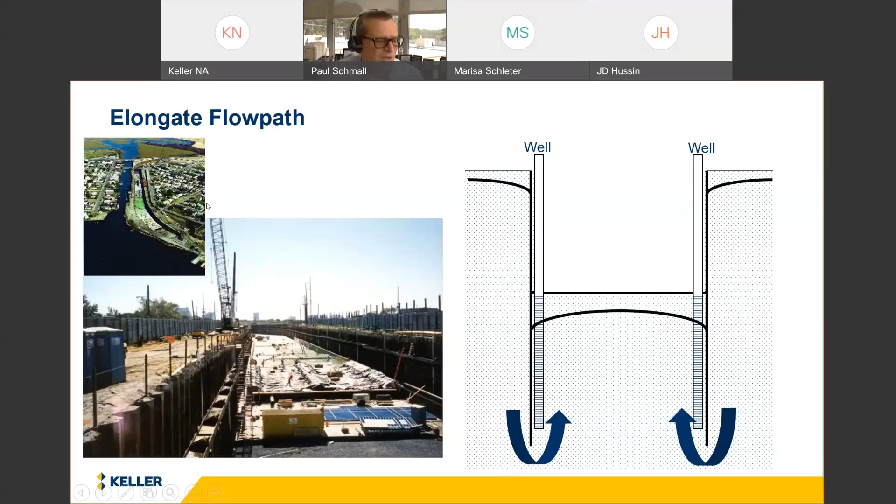and gravels, but we installed sheets well below the bottom of the excavation to elongate the flow path that the water would have to travel to find its way up into the excavation, and then hung the dewatering system on the inside of the excavation so the water has to flow around the corner and actually flow through a lower permeability silty sand at the tips of the sheets to reduce the flow. Significantly reduce the amount of groundwater lowering on the outside of the excavation, because this was in an area that had a lot of compressible soils, meadow mats, what we call them, in Atlantic City, New Jersey.

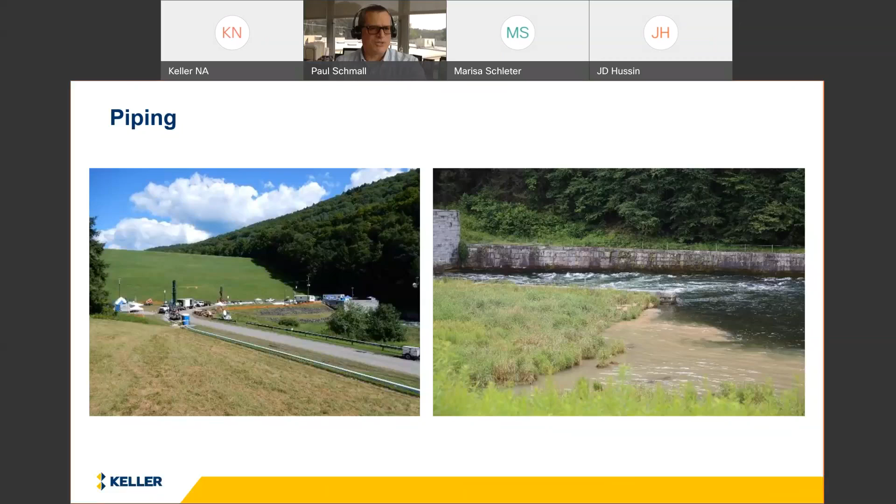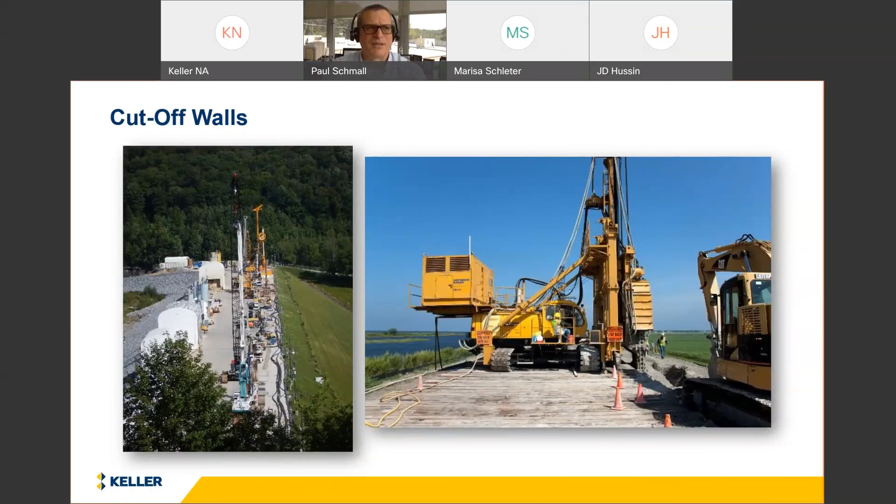The photograph on the left is East Branch Dam. That was a 247-foot deep cutoff wall that was over 2,000 feet long, a $180 million contract for us. The longest we've done, I think, is 4 miles and 270 feet deep for a continuous wall. So there's the whole topic of seepage grouting that we just don't have time to get into. It is a field unto itself.

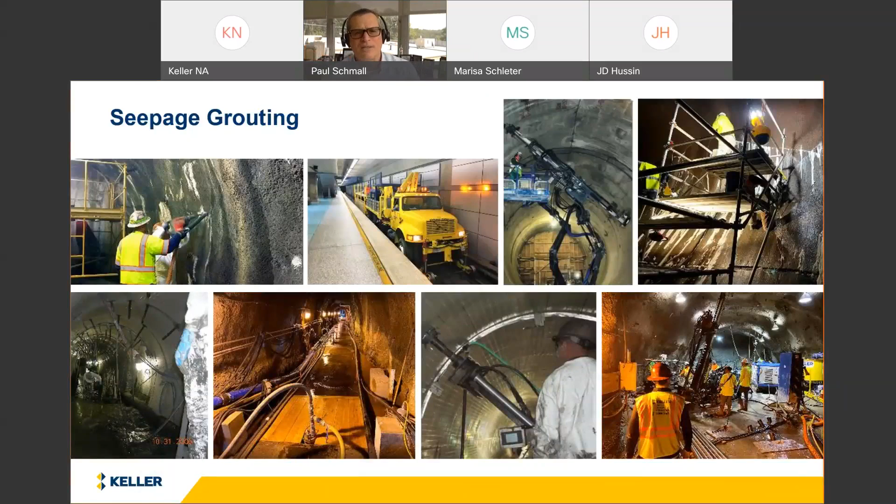Grouts formulated so that they will work under flowing water conditions and injected back into the structures to stop the flow of water through cracks or through faulty waterproofing, and provide semi-permanent waterproofing of the structure. A field unto itself. And then we have the whole concept of water flowing unanticipated into excavations. This catalog of notable tunnel failure case histories, you can find this on the internet, but I can tell you very quickly, it reads almost like a comic book.

Actually, I shouldn't say that because it's not funny, but it's a very simple read. And it's a number of repeat stories. Oh, hard rock tunnel. Oh, but we thought that was rock, but it's not actually rock. Soft ground, it's wet. Oh, and it's coming in on us. Open face digger shield tunnel in soft ground, and the story is, oh, we have wetness. We have water in the ground, and oh, the ground is flowing, and now, oh, we have a sinkhole.

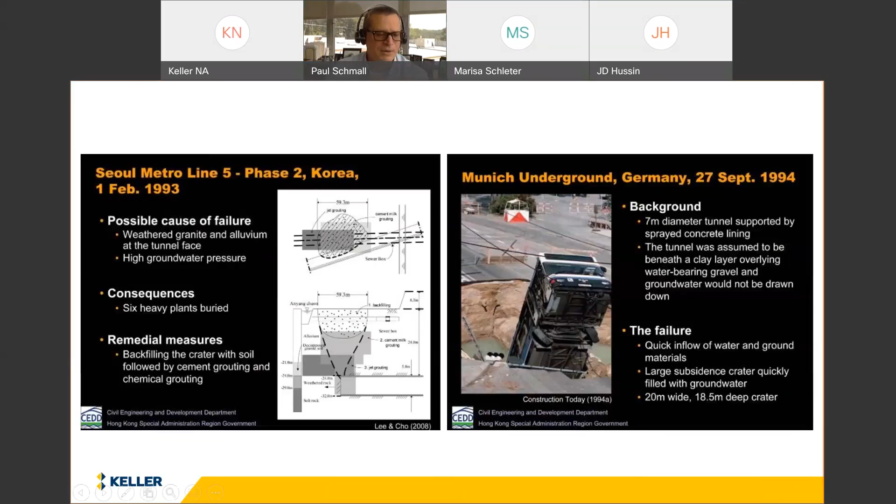Defect in a supported excavation or a cutoff wall, and oh, we didn't know we had that defect. And once you get down there and expose it at depth under high water pressure in unstable soils, we have a lot of material flowing in. Oh, and look at sinkholes. So a lot of these, it's really not a sinkhole unless a bus falls into it. You see, I don't know why, but there are all these pictures on the internet. Every sinkhole seems to have its own bus.

And then we have uncontrolled seepage and ground loss that may occur in these unanticipated inflow scenarios. And the story, you're going to think this is a shameless plug, but I don't mean it to be. The story always starts with hiring the cheap geotechnical contractor, and followed by having field personnel that don't have the skills to say, does this feel right? Anything that you do, all these ground improvement techniques and these cutoff methods, there's always some element of having data or seeing what the installation parameters are telling you, and having somebody experienced to look at it to say, does it feel right? When it doesn't feel right and it's missed sometimes, this is what happens, these unpleasant scenarios, these ground loss conditions.

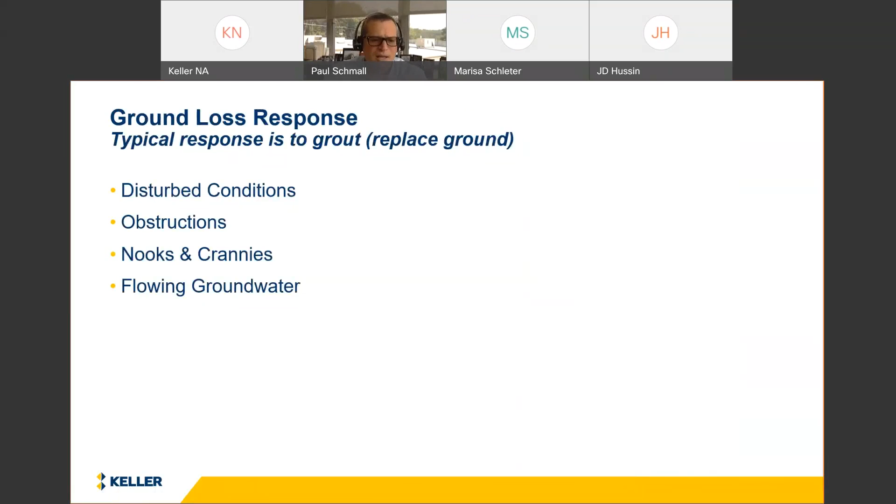And then it's whoa, and then we get the phone call because it's perceived to be a groundwater issue, because it is a groundwater issue, because these problems always happen because of the groundwater. And then we get the Houston, we have a problem phone call. So in these scenarios, when you have these problems, the conditions are always highly disturbed. Sometimes there's obstructions that flow into the newly placed ground or the infilled ground. There's nooks and crannies, and then you may have still flowing water conditions.

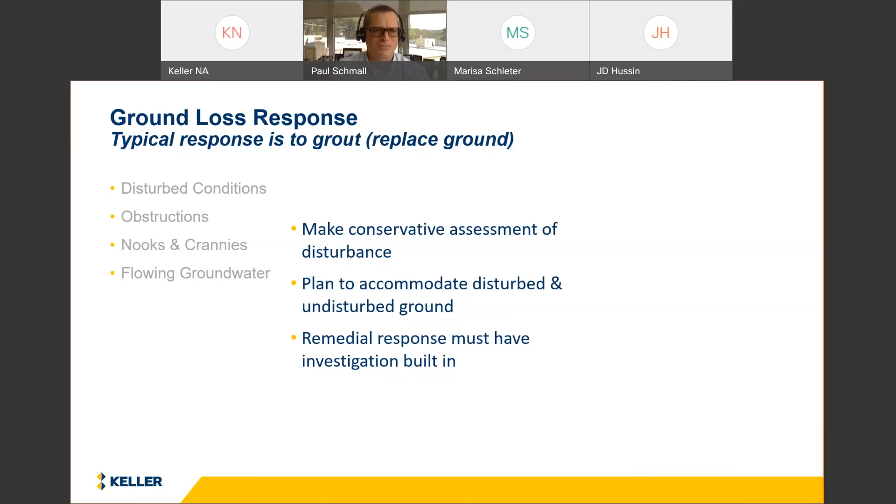So in order to respond appropriately, you can't go out and do a geotechnical. You've got to respond in emergency mode. So the geotechnical investigation has to be built into the response. So you have to just assume the worst in terms of disturbance, and assume that you're going to have some disturbed ground, some undisturbed ground, and then build the investigation into it. Usually I'm talking about grouting methods, because grouting methods are usually the response. Even though it's a groundwater situation, sometimes pumping groundwater is the response. Many times grout is the needed response, because you're trying to replace ground.

And when you're going to do the grouting, you really have to pick the right method, because you have one clean shot at fixing it. Because if that attempt didn't fix it, you've just left an obstruction for the next attempt. So it has to be handled very well, and very well with grouting. Ron Heuer, God bless his soul, used to say, grout is slow and dumb, water is smart and tenacious. I don't think he was referring to grout not working, but I think it was more of a statement that groundwater will find you at your weakest place or your weakest moment, and it's very smart and tenacious like that.

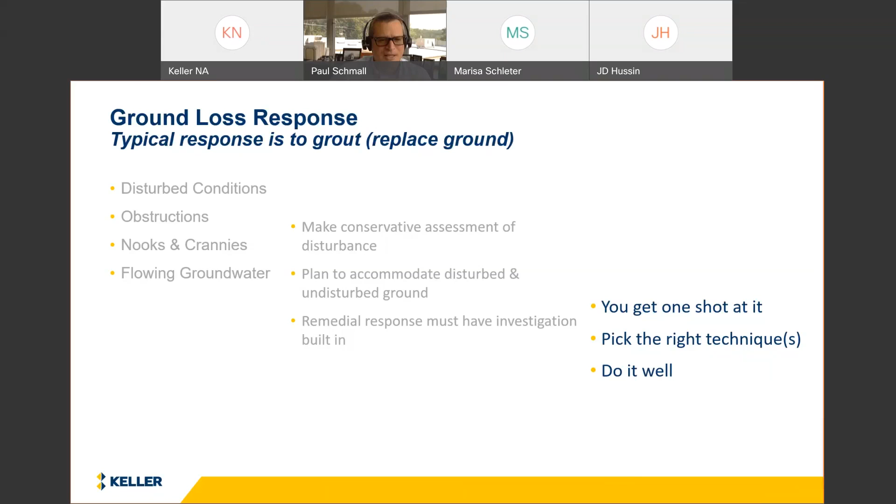So with that, sorry, I went a few minutes over. Do we have any questions?